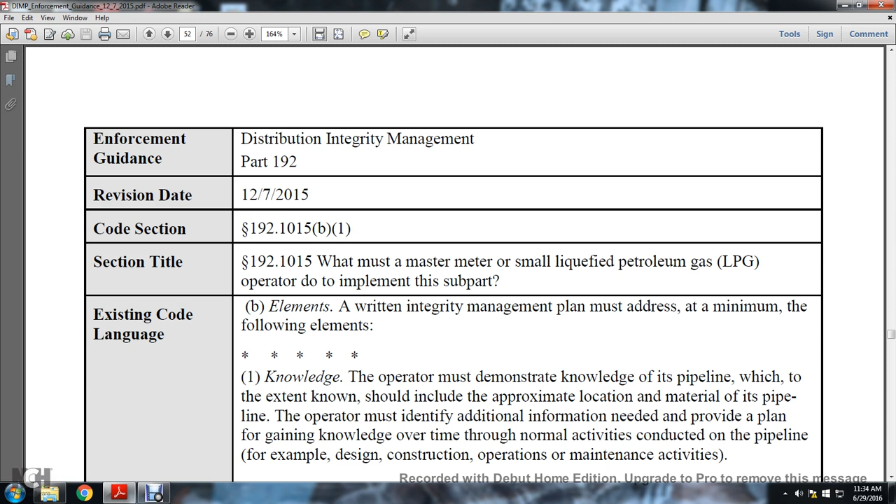Existing code language. B. The elements written integrity management plan must address at a minimum the following elements. 1. Knowledge. The operator must demonstrate knowledge of the pipeline, which to the extent known should include the approximate location and material of the pipeline. The operator must identify the additional information needed and provide a plan for gaining knowledge over time through the normal activities conducted on the pipeline, for example, design, construction, operation, and maintenance activities.

The origin of the code is 192.1015, 74 FR 63906, December 4, 2009. Last amendment not foreseeable. Interpretation summaries not foreseeable. Advisory bulletin alert and notice summaries not foreseeable. Other material and sources addressed in the Distribution Integrity Management Program Final Rule Preamble, the Federal Register, Volume 74, Number 232, Friday, December 4, 2009. Rules and Regulations. Comment Topic 20. Knowledge of the pipeline, environmental factors. Page 63919.

Distribution integrity management frequently asked questions. C4A1. The rule requires the operator to know its system; must the operator excavate simply to gather information about the parts of the system where it may not have complete knowledge? C4A2. There are some characteristics about the operator system that may not be known during the development of the integrity management program. What is the PHMSA expectation for filling those voids? C4A3. Qualified subject matter expert, and the details required to collect on new gas pipelines going into the ground.

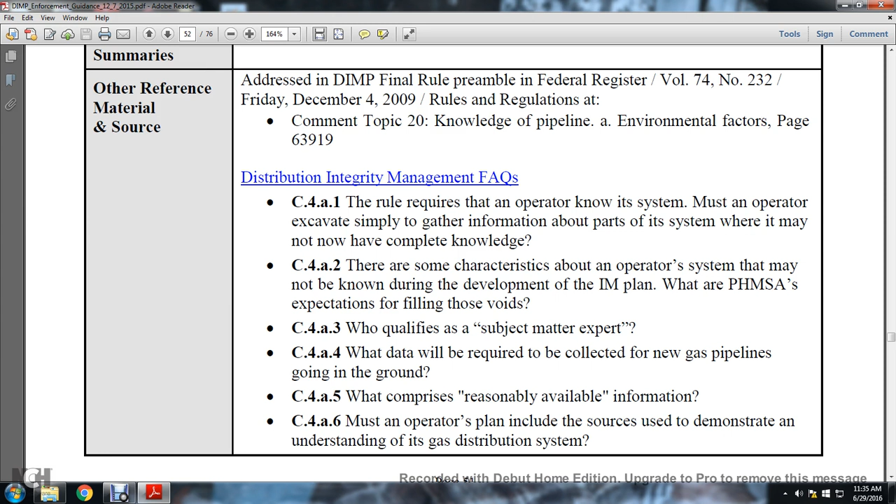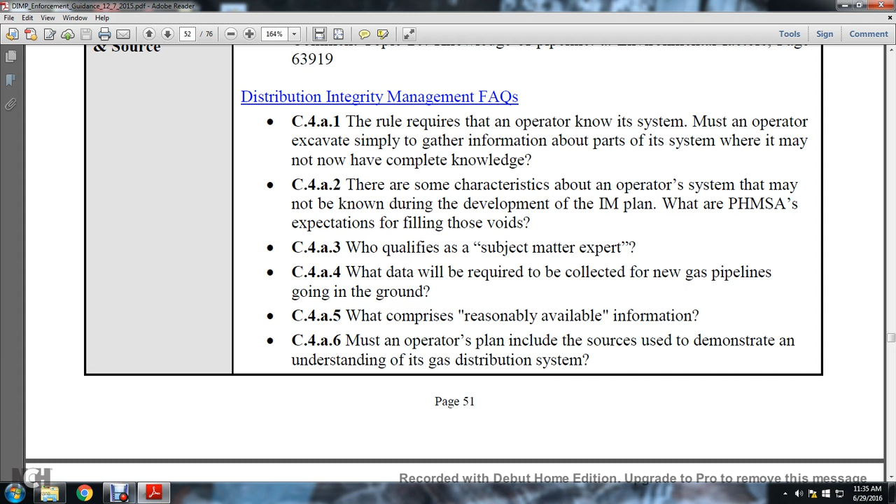C4A5. What comprises reasonably available information. C4A6. Must an operator's plan include the sources used to demonstrate an understanding of the gas distribution system. The Gas Piping Technology Committee guidance material, Appendix G-192-8, Section 3, Knowledge. Guidance information. 1. The master meter and the small liquefied petroleum gas operators are treated differently in the Distribution Integrity Management Program rule than large operators.

From 192.1001, the Integrity Management Plan means a written explanation of the mechanisms or procedures the operator will use to implement the integrity management program and to ensure compliance with the subpart. For most master meters and small liquefied petroleum gas operators, the integrity management program must include the appropriate set of mechanisms or procedures developed and implemented for each of the program elements.

The applicability of the word mechanism for these operators is important, as a synonym for process. The operator may employ a written explanation of the process employed, the mechanism developed and implemented for each required element, that is less specific than a written procedure. The integrity management program for these pipelines should reflect the relative simplicity of these types of pipelines. The distribution integrity management plan should be concise but still sufficient for the operator personnel to understand and implement the program on a consistent basis.

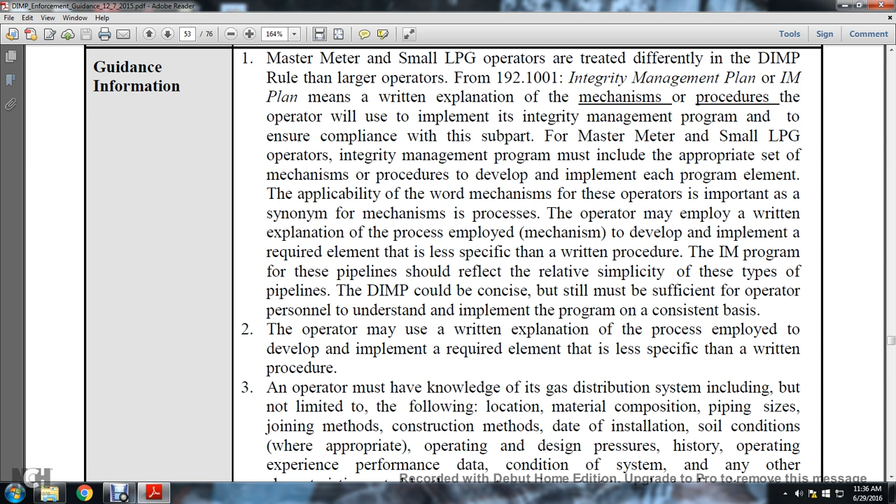2. The operator may use a written explanation of the process employed, developed and implemented for the required element, that is less specific than a written procedure. 3. An operator must have knowledge of the gas distribution system including but not limited to the following: location, material, composition, pipe size, joint method, construction method, date of installation, soil conditions where appropriate, operating and design pressure, history, operating experience, performance data, condition of the system, and any other characteristics noted by the operator.

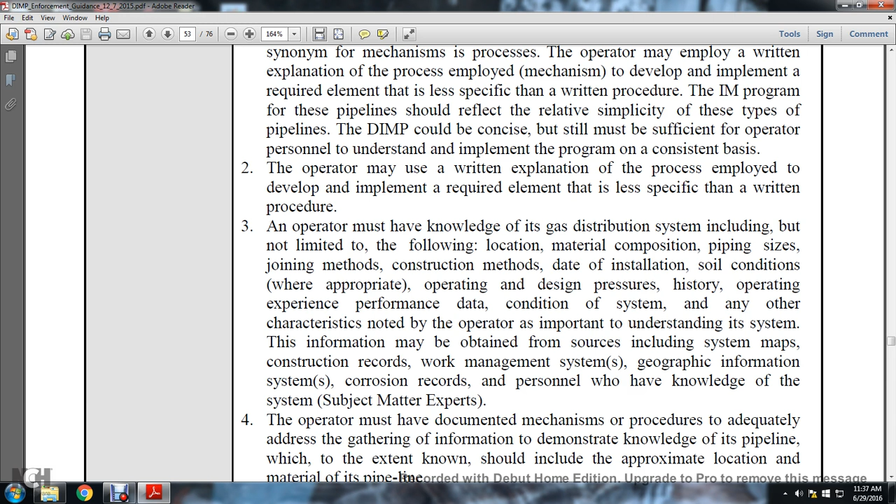An important understanding of the items in this information may be obtained from sources including system maps and construction records, work management systems, geographical information, corrosion records, and personnel having knowledge of the system, subject matter experts. 4. The operator must have a documented mechanism or procedure adequately addressing gathering information to demonstrate knowledge of its pipeline, which to the extent known should include the approximate location and material of the pipeline.

5. The operator must identify the additional information needed and provide a plan for gaining knowledge over time through the normal activities conducted on the pipeline, for example, design, construction, operation, and maintenance activities. The Distribution Integrity Management Program must list the names of the operator-specific information sources not generic terms such as O&M documents.

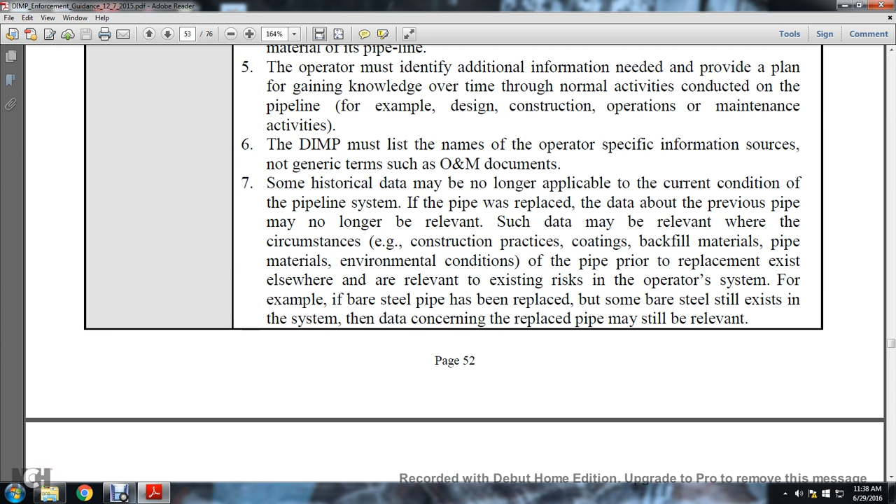Some historical data may be no longer applicable for the current condition of the pipeline system. The pipe was replaced; the data of the previous pipe may no longer be relevant. Such data may be relevant where the circumstances of the construction practice, coating, backfilling, materials, piping, and environmental conditions of the pipe prior to replacement exist elsewhere, and are relevant to existing risks in the operator system. For example, if bare steel pipe has been replaced but some of the bare steel still exists within the system, the data concerned with the replaced pipe may still be relevant.

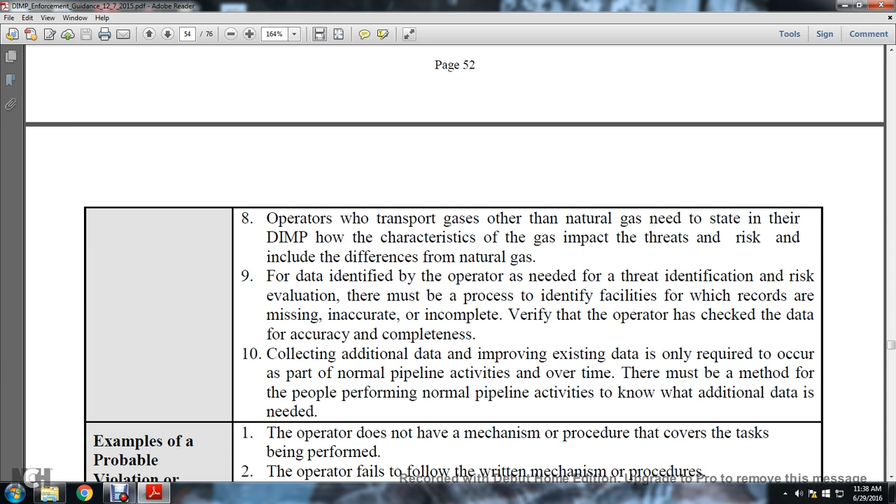8. Operators who transport gas other than natural gas need to state in their distribution integrity management program how the characteristics of the gas impact the threat and risk, including the difference from natural gas. 9. For the data identified with the operator need for threat identification and risk evaluation, there must be a process to identify the facilities for which records are missing, inaccurate, or incomplete, verifying the operator has checked the data for accuracy and completeness.

10. The collection of additional data improving existing data is only required to occur as a part of the normal pipeline activities over time. There must be a method for people performing normal pipeline activities to know what additional data is needed. Examples of probable violation or inadequate procedures: the operator does not have a mechanism or procedure that covers the task being performed. The operator fails to follow the written mechanism or procedures.

3. The operator did not demonstrate that they have looked at all available sources or resources, records, finding information on the past design, operation, maintenance, such as coating material. 4. Operator did not specifically list the documents used to assemble the knowledge of the system. Operator does not gather or use reasonably available data on the entire pipeline that could be relevant to performing the threat assessment and risk evaluation as needed for the group of facilities.

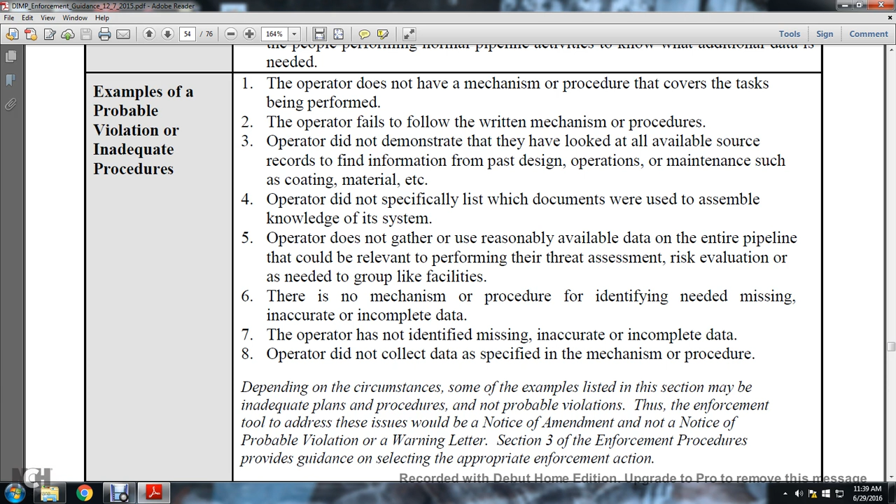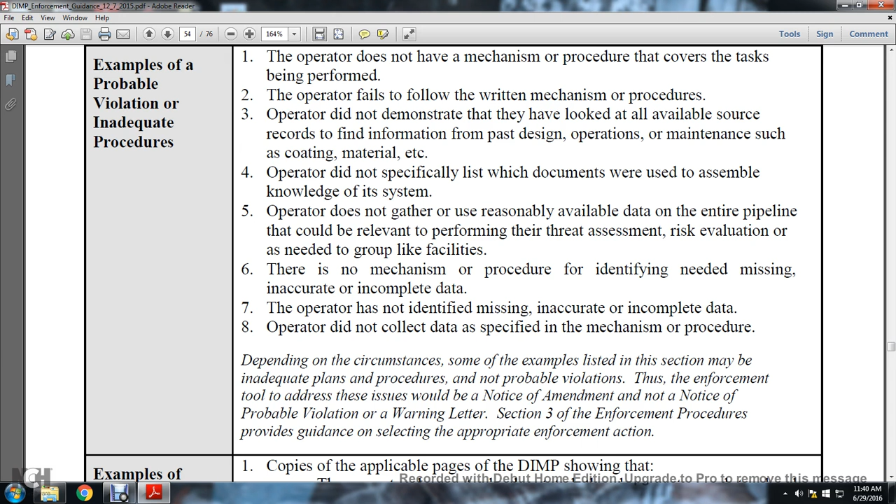6. There is no mechanism or procedure to identify the need for the missing, inaccurate, and incomplete data. The operator has not identified the missing, inaccurate, incomplete data. Operator did not collect the data specified in mechanism procedures. Italics: depending on the circumstances, some of the examples listed in this section may be inadequate plans or procedures, not probable violations. Thus, enforcement tools to address these issues would be notice of amendment, notice of probable violation, or a warning letter. Section 3, the enforcement procedure, provides guidance for selecting appropriate enforcement action.

Examples of evidence. Copies of the applicable pages of the Distribution Integrity Management Program showing the operator has not clearly stated the documents used to develop knowledge of the system. The list of the documents used to develop knowledge of the system is inadequate in identifying design, operating, environmental characteristics of the pipeline system. 2. The copies of applicable pages of the Distribution Integrity Management Program show the program is not detailed enough for the inspector to make a reasonable determination as to the accuracy and thoroughness of the process.

Examples of evidence: copy the applicable page of the operator distribution integrity management program showing the required regulation provisions are not documented or that the records or other documentation are insufficient to prove compliance with the intended regulation or provisions. Copy the applicable page of the operator distribution integrity management program showing the required data collection and utilization of the data not in the distribution integrity management program. Documented photograph evidence demonstrating the violations. Documented oral or written statements from operator personnel. The other special notifications are blank.

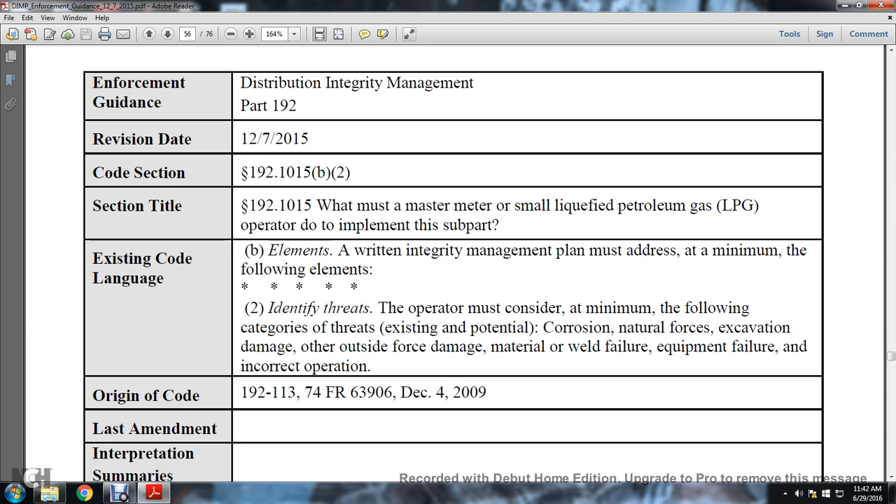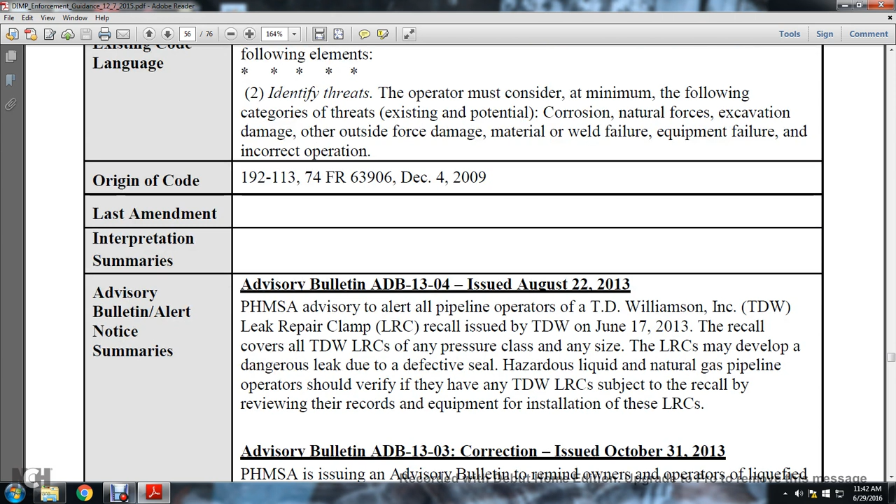Continuing on, Distribution Integrity Management Part 192, December 7, 2015, 192.1015(b)(2). Also, the section title 192.1015, what must a master meter or small liquefied petroleum gas operator do to implement this subpart. Existing code language: elements of a written integrity management plan must address at a minimum the following elements. 2. Identifying threats: the operator must consider at a minimum the following categories: corrosion, natural forces, excavation damage, other outside force damage, material and weld failure, equipment failure, and incorrect operation. Origin of Code 192-113, 74 FR 63906, Federal Register, December 4, 2009, and last amendment. Interpretation summaries not available.

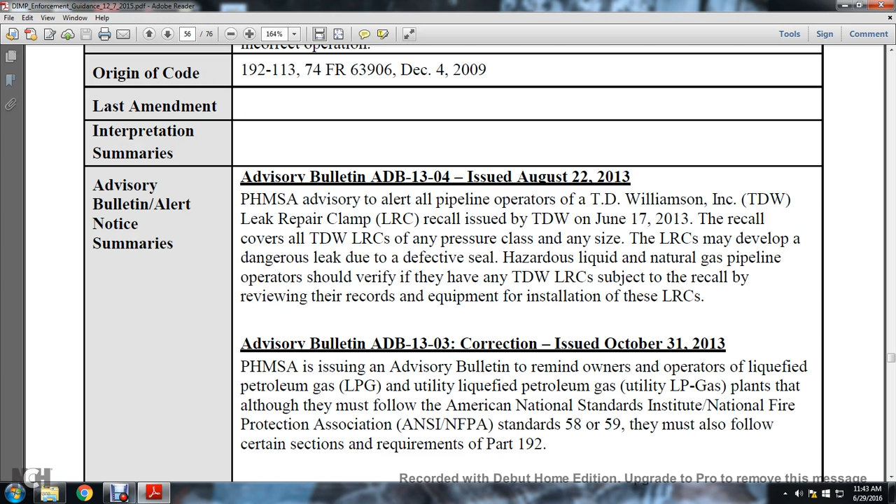Advisory Bulletin: Alert Notice Advisory Bulletin 13-04 issued on August 22nd, 2013. The Pipeline and Hazardous Materials Safety Administration advises and alerts all pipeline operators of the T.D. Williamson Incorporated Leak Repair Clamp, or LRC, recall issued by TDW on June 17, 2013. The recall covers the T.D. Williamson Incorporated leak repair clamp for all pressure classes; any size of the leak repair clamp may develop a dangerous leak due to defective seals. Liquid and natural gas operators should verify whether they have any T.D. Williamson Incorporated leak repair clamps subject to the recall by reviewing their records and inspecting the leak repair clamps.

Advisory Bulletin 1303, correction issued on October 31, 2013. The Pipeline and Hazardous Materials Safety Administration issued an advisory bulletin to remind owners and operators of liquefied petroleum gas or utility liquefied petroleum gas plants that although they must follow the American National Standards Institute and National Fire Protection Association standards 58 and 59, they must also follow certain section requirements of Part 192.

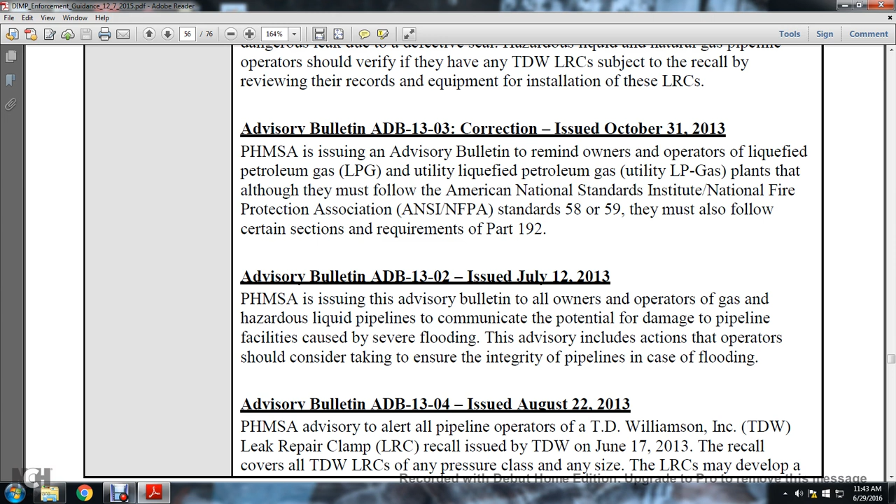Advisory Bulletin 1302, issued July 12, 2013. PHMSA issued the Advisory Bulletin to all owners and operators of gas and hazardous liquid pipelines to communicate potential damage to pipeline facilities caused by severe flooding. The Advisory includes actions operators should consider taking to ensure the integrity of pipelines in the case of flooding.

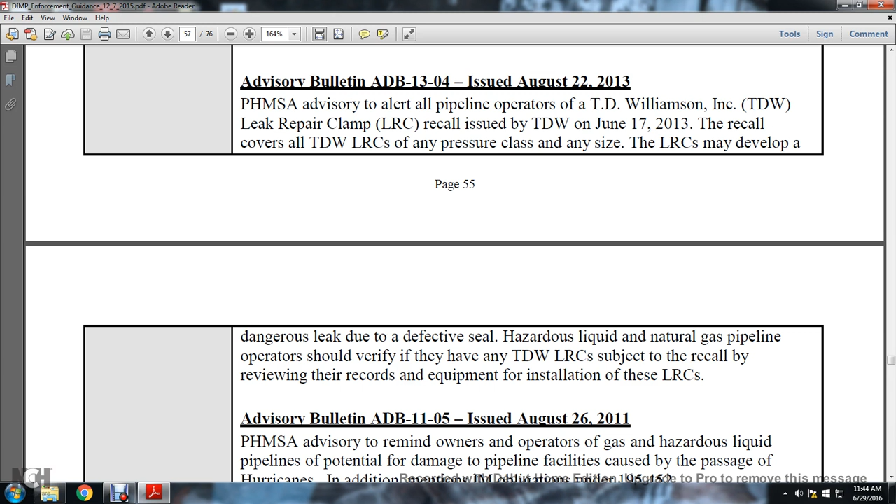Advisory Bulletin 1304, issued August 22nd, 2013. Pipeline and Hazardous Materials Safety Administration Advisory to alert all pipeline operators of a T.D. Williamson Incorporated Leak Repair Clamp recall, issued by T.D. Williamson Incorporated on June 17, 2013. The recall covers TDW's leak repair clamps of any pressure classes and sizes. The leak repair clamp may develop a dangerous leak due to a defective seal. Hazardous liquid and natural gas pipeline operators should verify if they have any T.D. Williamson Incorporated leak repair clamp subject to the recall by reviewing records and equipment for installation of the repair clamps.

Advisory Bulletin 1105, issued August 26, 2011. Pipeline and Hazardous Materials Safety Administration Advisory to remind owners and operators of gas and hazardous liquid petroleum pipelines of the potential for damage to pipeline facilities caused by the passage of hurricanes. In addition, it mentions integrity management obligations under

195.452. Advisory Bulletin 1205, issued March 20th, 2012. Pipeline and Hazardous Materials Safety Administration urged owners and operators to conduct a comprehensive review of their cast iron distribution pipeline system replacement programs, to accelerate the repair, rehabilitation, and replacement of aging high-risk pipeline. In addition, the Advisory Bulletin notes regulatory requirements for natural gas distribution companies to develop a Distribution Integrity Management Program for pipelines owned, operated, and maintained.

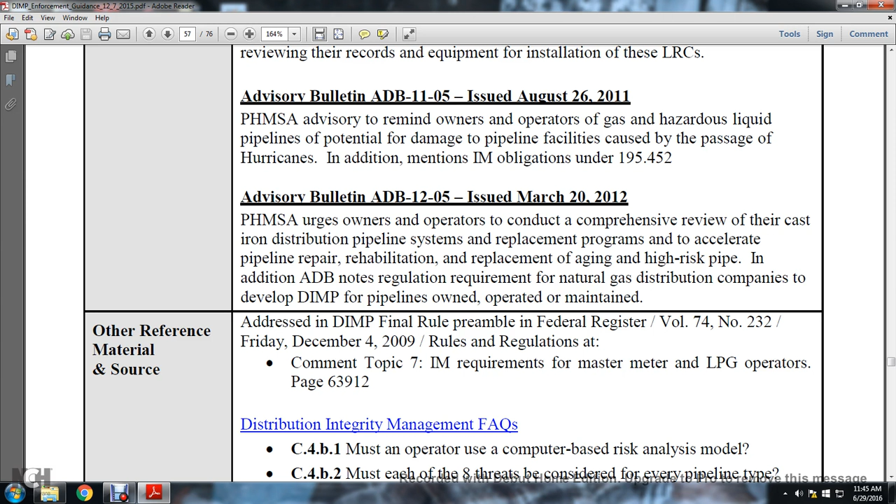Other reference sources addressed in the Distribution Integrity Management Final Rule Preamble of the Federal Register 74-232, Friday, December 4, 2009, Rules and Regulations, Comment Topic 7 on Integrity Management requirements for Master Meter and Small Liquefied Petroleum Gas Operators, page 63912. Distribution Integrity Management Frequently Asked Questions, C4B1.

C4B2: Must each of the 8 threats be considered for every pipeline type?

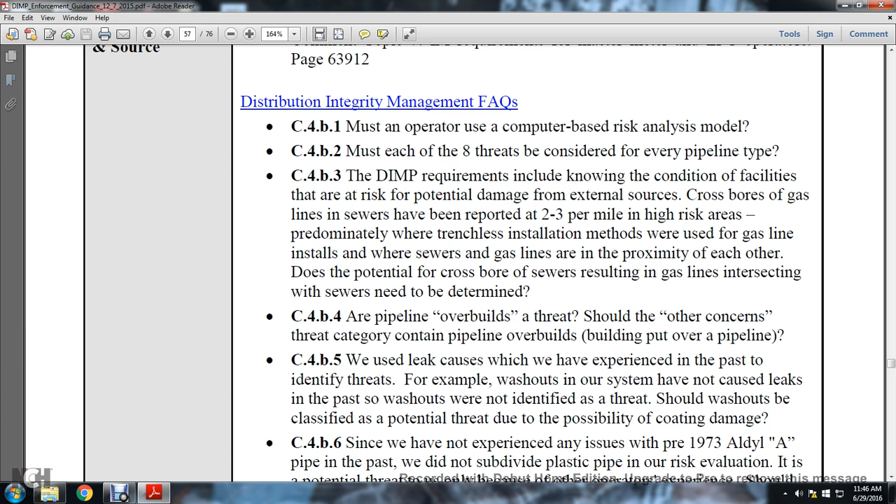C4B3: The Distribution Integrity Management Program requires knowing the condition of facilities that are at risk, and the potential damage from external sources, such as cross-bores of gas lines and sewers that have been reported at 2 to 3 per mile in high-risk areas, predominantly where trenchless installation methods were used for gas line installation, where sewer and gas lines are approximately near each other. The potential of cross-bore sewers resulting in gas line sections intersecting with sewers needs to be determined.

C4B4: Are pipeline overbuilds a threat? Should the other concerns threat category contain pipeline overbuilding, where a building is built over the pipeline?

C4B5: We use leak causes which we have experienced in the past to identify threats. For example, washouts in our system have not caused leaks in the past, so washouts are not identified as a threat. Should washouts be classified as a potential threat due to the possibility of coating damage?

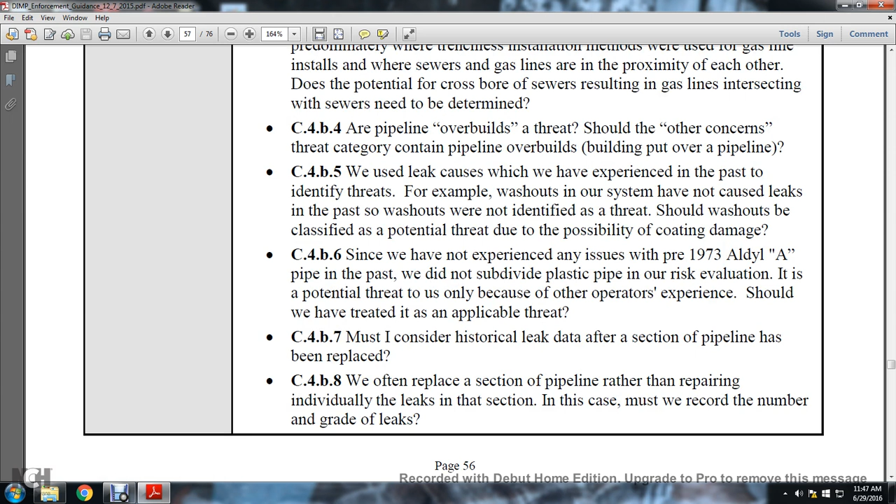C4B7: Must I consider historical leak data after a section of pipeline has been replaced? C4B8: We often replace sectional pipeline rather than repairing individual leaks in that section. In this case, we must record the number and grade of leaks.

C4B9: We experience problems in ranking potential threats, as some low frequency events have not occurred in our system to date. When this occurs, mixing apples and oranges arises when assigning frequency or probability to a threat that has not occurred, and ranking it alongside events that do have frequency. How should we account for low or no frequency threats when evaluating and ranking risk?

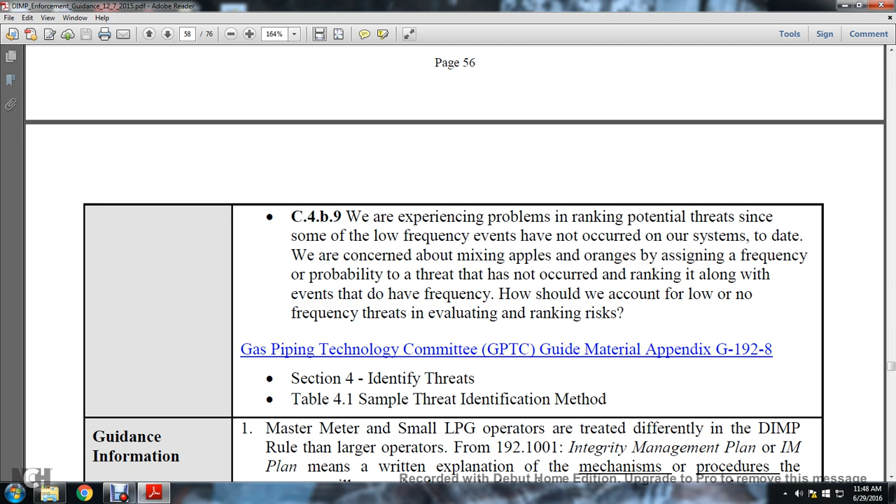The Gas Piping Technology Committee Guide Material, Appendix G192.8, Section 4, Identify Threats, Table 4.1, Sample Threat Identification Method.

The integrity management program for the pipeline should reflect the relative simplicity of these types of pipelines. The distribution integrity management program could be concise but still sufficient for the operator personnel to understand and implement the program on a consistent basis.

The operator may use a written explanation of the process employed to develop and implement a required element that is less specific than the written procedure.

After characterizing the system, the operator must identify the threats relevant to the distribution segments. The process must meet the need for establishing realistic identification of threats and determination of whether the frequency and level of significance requires a response that goes beyond normal operating practices.

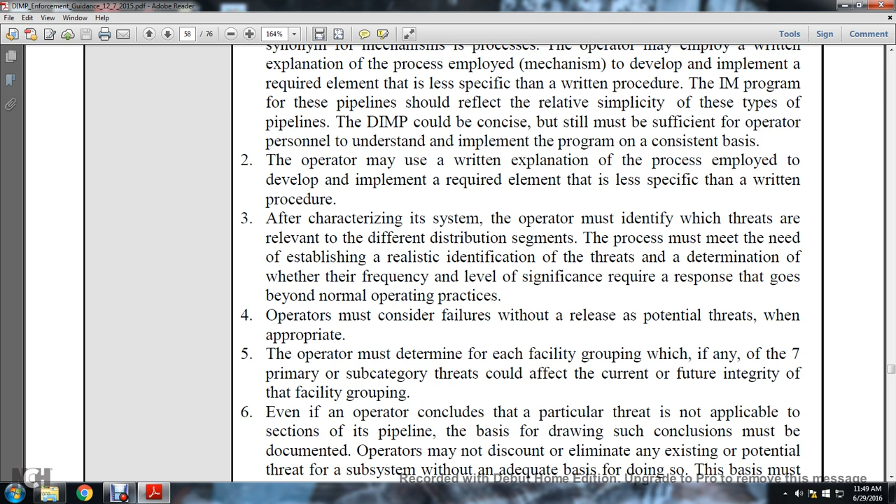The operators must consider failures without release as potential threats when appropriate. The operator must determine for each facility grouping whether any of the 7 primary or subcategory threats could affect the current or future integrity of the facility grouping.

Even if the operator concludes a particular threat is not applicable to sections of the pipeline, the basis for drawing such conclusions must be documented. The operators may not discount

or eliminate any existing or potential threats to the subsystem without adequate basis for doing so. The basis must consider pipeline failure history, design, manufacturing, construction, operation, and maintenance. The reason for excluding the pipe must be documented within the operator's integrity management program.

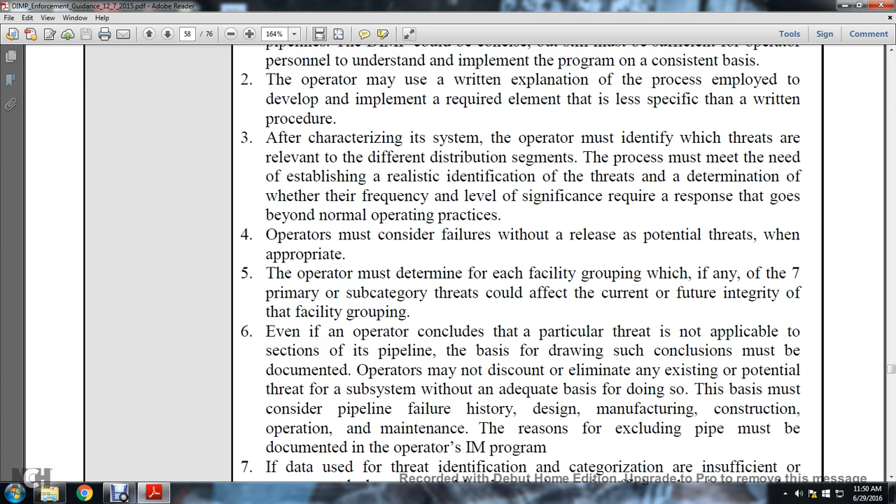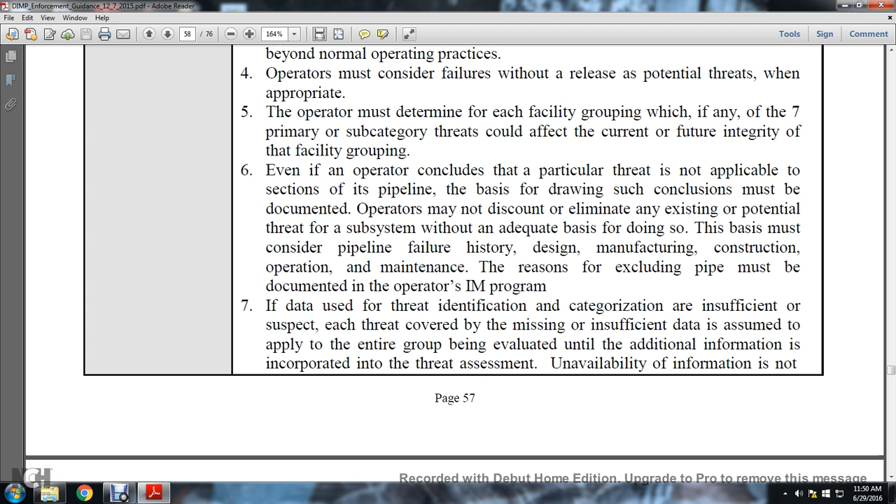If the data used in threat identification and categorization are insufficient, each threat covered by the missing or insufficient data shall be assumed to apply to the entire group being evaluated, until the additional information incorporated into the threat assessment.

Unavailability of information is not justification for exclusion of a threat. Where the data is missing or insufficient, conservative assumptions should be used in the risk assessment. Records must be maintained to identify the unsubstantiated data used that impact the variable accuracy of the assessment, and the results would be considered.

It may also be appropriate to subdivide threats, for example, to consider atmospheric corrosion of above-ground pipe and external corrosion of buried pipeline separately. Another example would be subdividing or knowing the problem materials.

Excavation damage must be included in threats considered within the distribution integrity management program. Even if the operator has good external damage experience through the damage prevention program, it is not acceptable for the operator to say that this threat is dealt with outside the distribution integrity management program, and therefore need not be included.

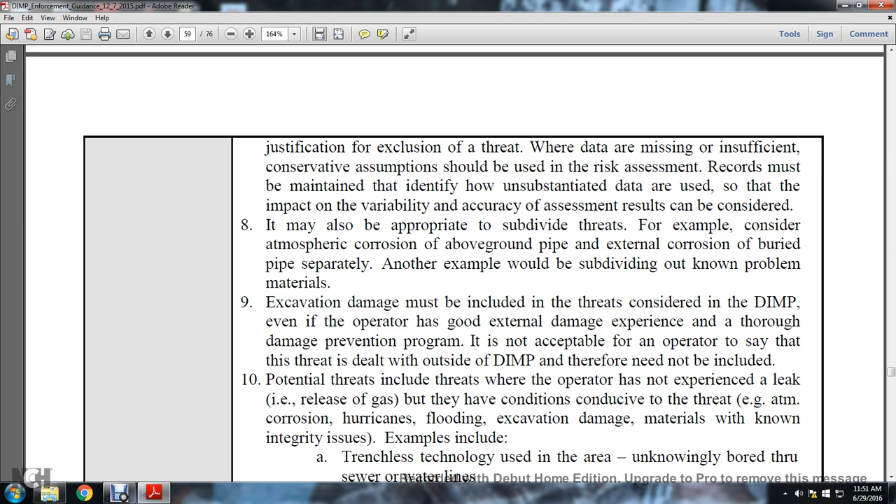Potential threats include threats where the operator has not experienced a leak or release of gas, or where they have conditions conducive to threats such as corrosion, hurricane, flooding, excavation damage, materials with known integrity issues.

Examples include: trenchless technology used in the area unknowingly bored through sewer and water lines; future utility road improvement projects; the discovery of material not previously known to be in the system; the customer built structure over the existing pipelines; and overpressurization events.

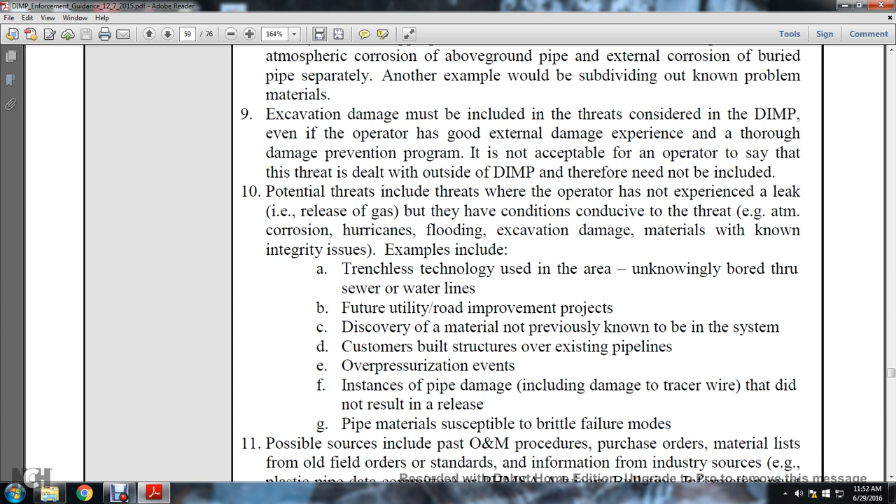An incident where the pipeline got damaged, including damage of the tracer wire, that did not result in release; and pipe materials susceptible to brittle failure modes.

Possible sources include operation and maintenance procedures, purchase orders, material listings from old field orders and standards, information from industry sources, the plastic pipe data committee, or the Pipeline Hazardous Materials Safety Administration advisory bulletins.

Information must include, for example, past continuing surveillance records per 192.613, and the example of a probable violation or inadequate procedures.

The operator does not have a mechanism or procedure to cover the task being performed. The operator fails to follow the written mechanism or procedure. The mechanism or procedure does not include review of the 7 primary threats. Not all of the 7 primary threats required by law or rule were adequately considered or evaluated.

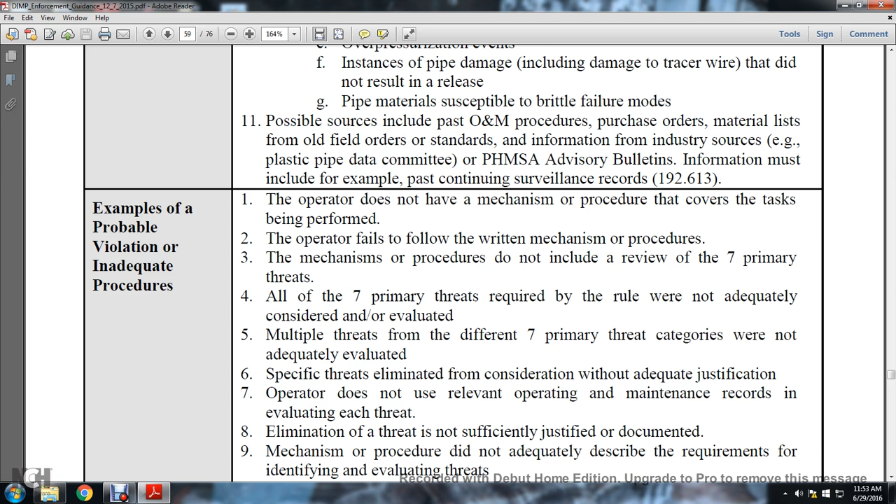Multiple threats from different primary threat categories were not adequately evaluated. Specific threats were eliminated from consideration without adequate justification. The operator does not use relevant operating and maintenance records in evaluating each threat. Eliminating a threat is not sufficiently justified or documented.

Mechanisms or procedures did not adequately describe the requirements for identifying and evaluating threats. The operator did not use reasonable and appropriate subdivision of threats. The mechanism or procedure did not include review of potential threats. The operator did not use all reasonably available records.

Depending on the circumstance, some examples listed in the section may be inadequate for plans or procedures but not a probable violation. The enforcement tools to address these issues would be notice of amendment, notice of probable violation, or warning letter. Section 3 of the enforcement procedures provides guidance for selecting appropriate enforcement action.

Examples of evidence include copies of applicable pages from the operator's integrity management program which demonstrate inadequate mechanisms and procedures, and reasonably available external information, such as advisory bulletins identifying threats applicable to the operation system that were not considered in developing the distribution integrity management program.

Documented photographic evidence that demonstrates the violation, and documented oral or written statements from operational personnel, or special notations not otherwise visible.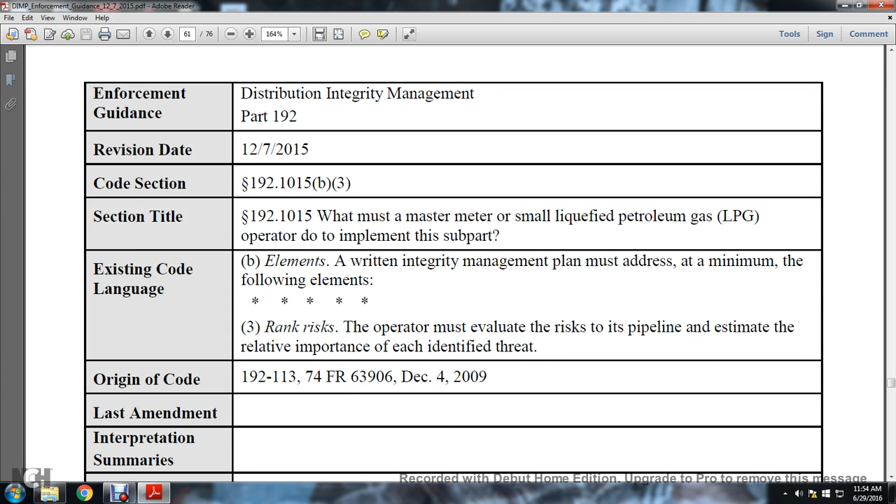Rank risk: the operator must evaluate the risk of its pipeline and estimate the relative importance of each identified threat. The origin code is 192-113, 74 Federal Register 63906, December 4th, 2009.

Last amended interpretation summaries and advisory bulletin alert notice summaries are not reflected here. Other reference material addresses the Distribution Integrity Management Program Final Rule Preamble, Federal Register Volume 74, Number 232, Friday, December 4, 2009, Rules and Regulations, Comment Topic 22, Risk Ranking Assessment, page 63920.

Distribution Integrity Management frequently asked questions. C4, C1: What are the key things the operator should focus on when developing an effective risk assessment methodology? C4, C2: From which date is the operator required to collect data for their plan?

C4, C3: How are identified threats to system integrity expected to be handled in an operator's distribution integrity management program plan? C4, C5: Do multiple threats need to be considered for each facility grouping, and do all threats need to be in one relative risk ranking?

C4, C6: What is expected of a multi-state operator in regard to risk ranking? C4, C7: If an operator plans to perform risk ranking by state, regardless of the outcome of the risk ranking, will it not decrease the historical level of expenditures for each system?

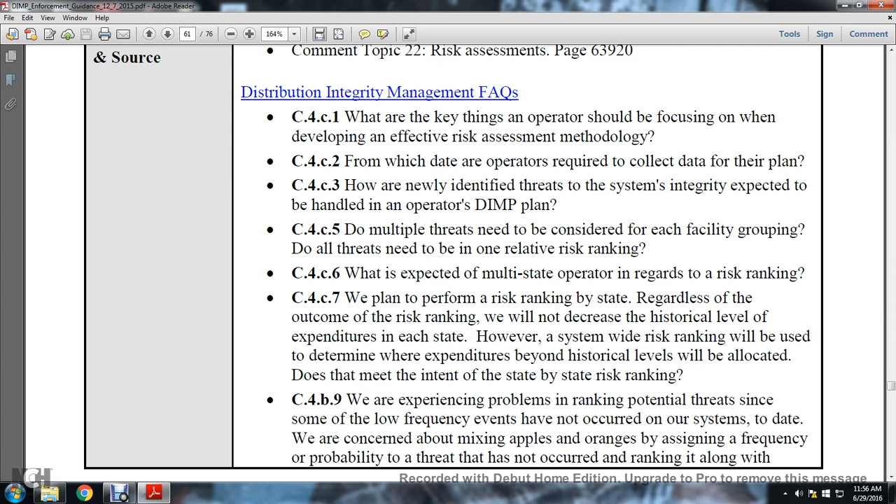However, the system-wide risk ranking will be used to determine whether expenditure beyond historical levels allocated meets the intent of the state and the state's risk ranking.

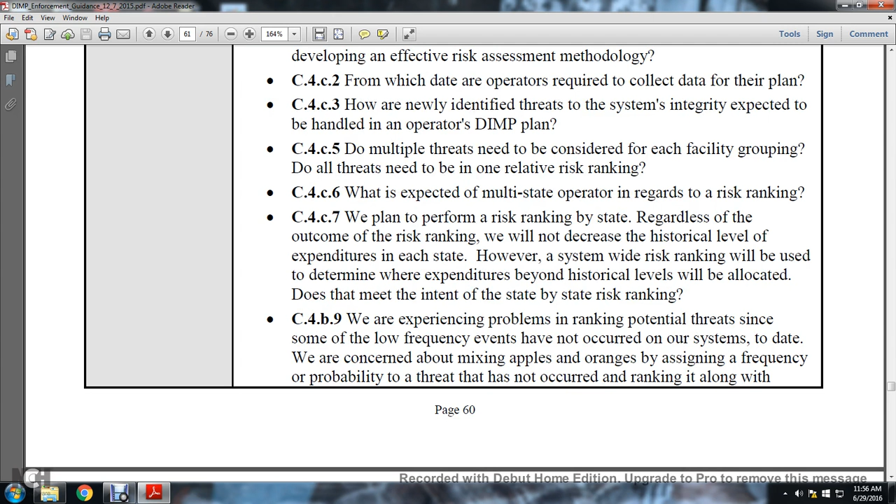C4, B9: We are experiencing problems ranking potential threats, as some low-frequency threats have not occurred in our systems to date. We are concerned with mixing apples and oranges by assigning a probability to a threat that has not occurred alongside events that have due frequency. How should we account for low or no-frequency threats when evaluating and ranking risk?

Gas Piping Technology Committee Guide Material, Appendix G-192-8, Section 5: Evaluating and Ranking Risk. The guidance information treats master meter and small liquefied petroleum gas operators differently in the Distribution Integrity Management Program, per Section 192.1001, Integrity Management Plan.

The Integrity Management Plan means of written explanation, mechanism, or procedure. The operator will use the implemented integrity management program to ensure compliance with the subpart for master meter and small liquefied petroleum gas operators.

The integrity management program must include an appropriate set of mechanisms and procedures developed and implemented for each program element. The applicability of the word 'mechanism' for the operator is important, as it is a synonym for the process the operator may employ—a written explanation of the process employed with the mechanism developed and implemented.

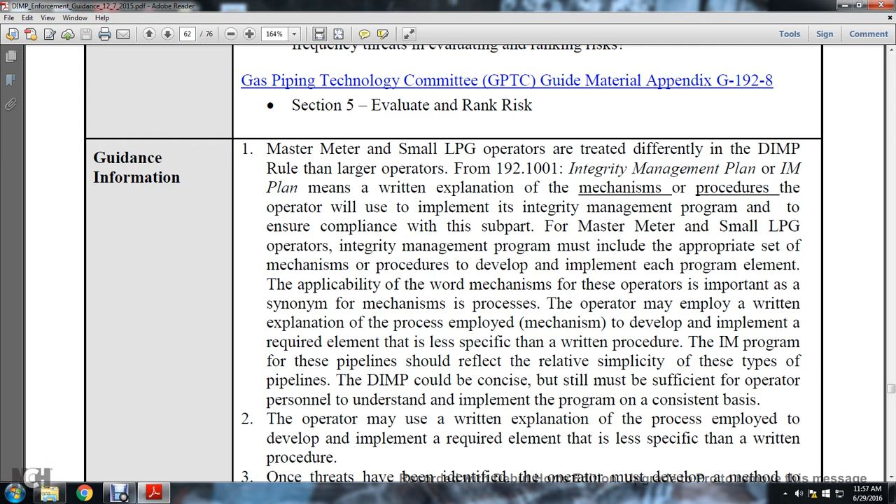The required elements are less specific for the written procedure. The integrity management program for the pipeline should reflect the relative simplicity of these types of pipelines. The distribution integrity management program could be concise but still sufficient for operator personnel to understand and implement the program consistently.

The operator may use a written explanation of the process employed to develop and implement required elements, less specific than a written procedure. Once a threat has been identified, the operator must develop a method to assess and prioritize associated risk, in order to address those of greatest concern first.

In performing the risk analysis, it is important to note the risk, the likelihood of the event occurring times the consequence of the event. An event that is highly likely and has a highly public safety consequence constitutes an event of the greatest concern.

An unlikely event having minimal consequences may not justify extraordinary precautions, while an unlikely event that could have very high consequences may justify additional precautions. Distribution incidents are defined in Title 49 CFR 191, Transportation of Natural and Other Gas by Pipeline.

Annual reports, incident reports, safety-related condition reports, and data contained within the Pipeline and Hazardous Materials Safety Administration incident database often capture events that are low likelihood but highly consequential.

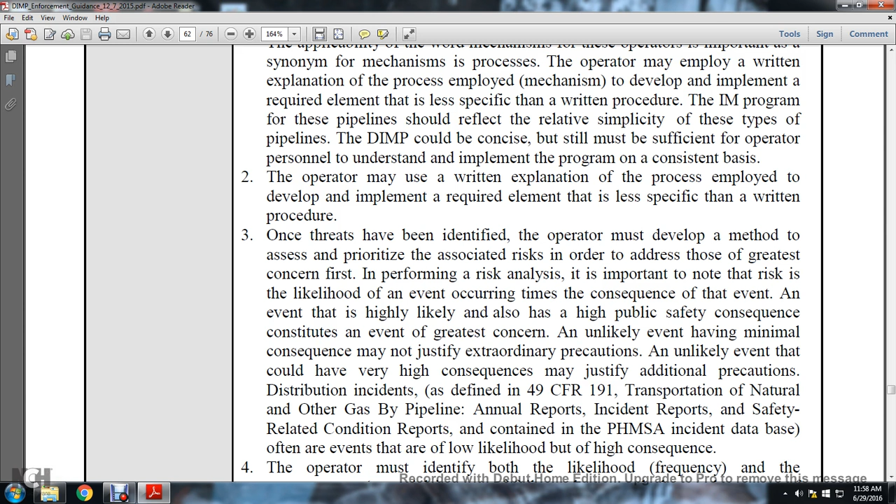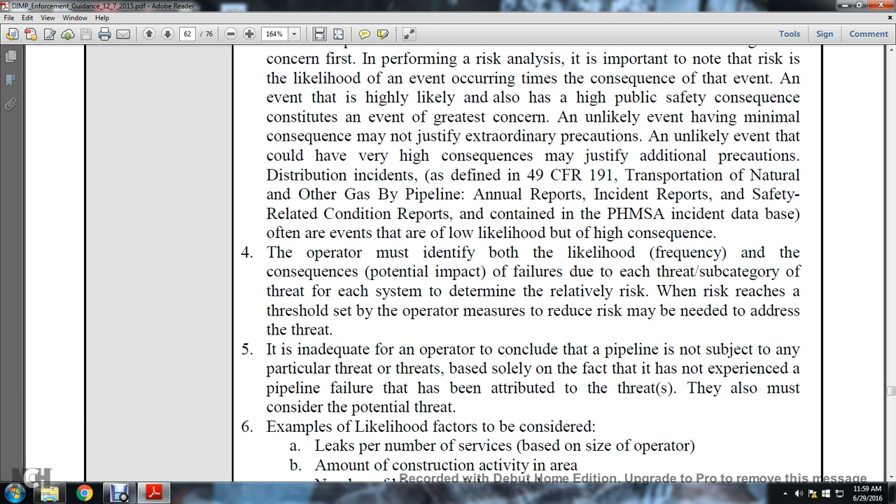4. The operator must identify both likelihood of the frequency of the consequence and the potential impact of the failures due to each of the subcategory threat in each system, determining the relative risk. When the risk reaches a threshold set, the operator measures to reduce the risk may be needed to address the threat. 5. It is inadequate for the operator to conclude that the pipeline is not subject to any of the particular threats based solely on the fact that it has not experienced a pipeline failure that has been attributed to the threat, and they also must be considered a potential threat.

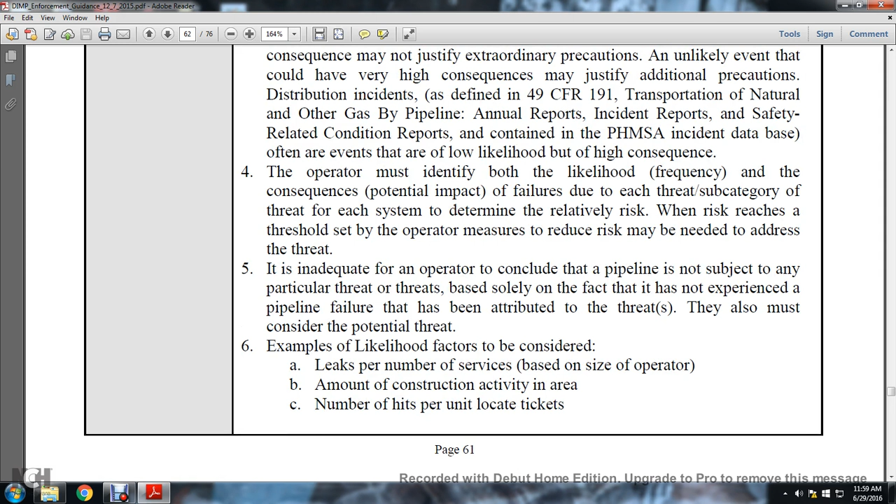Example, the likelihood factors to be considered: A, leaks per number of services based on the size of the operator, B, the amount of construction activity in the area, and C, the number of hits per unit locate tickets. 7. Example, the consequence factors to be considered: A, operating pressure, B, population density, downtown versus rural, C, impact, loss of supply, D, the number of the customers affected, E, the proximity to structures and critical facilities, schools, and hospitals, F, the proximity of known groups of people limited in mobility, usually institutionalized.

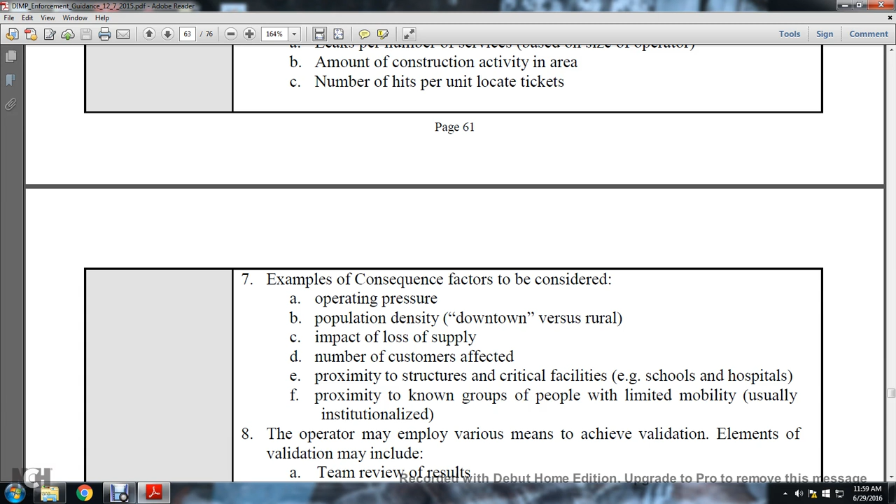8. The operator may employ various means of achieving validation. Elements of the validation may include team review of the results, subject matter expertise reviews. And 9. The operator must have the mechanism, procedure, validation, results of the risk analysis process. The result generated by the model should agree with the consensus of the validation group. If analysis results do not identify known risks, the factors, evaluation model, or method must be questioned and analyzed and, if necessary, revised.

Examples of probable violations and inadequate procedures: the operator does not have a mechanism procedure for the coverage of the task being performed. The operator fails to follow the written mechanism procedure. The operator did not perform risk evaluation to estimate the relative importance of the identified threat. A comprehensive risk analysis process was not adequately developed. 5. All portions of the pipeline were not included in the risk analysis. 6. The process did not adequately consider the unique risk factors when using the standard risk model.

7. The risk analysis process was not adequately documented. 8. The risk analysis process did not adequately consider all identified risks. 9. The operator's specific leak and failure history and other operational experience were not adequately considered in the risk analysis. 10. Poor quality data was used in the risk analysis. 11. The basis for risk model scores has inadequate documentation. 12. The operator did not validate the results of the risk evaluation.

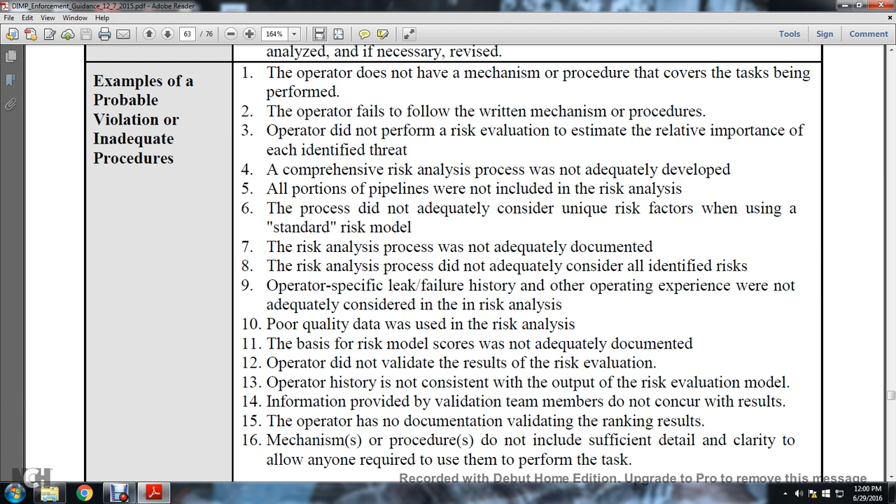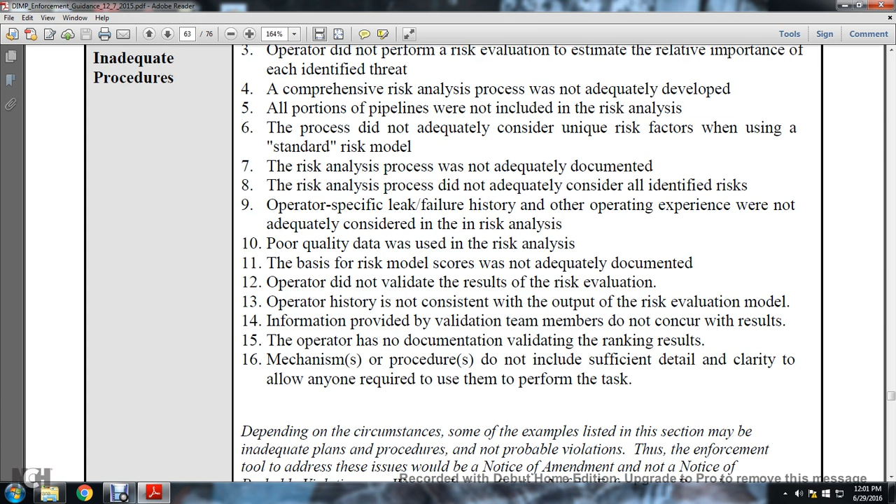13. The operator history is not consistent with the output of the risk evaluation model. Information provided by the validation team does not concur with the results. The operator has no documented validation of the ranking results. 16. The mechanism procedure does not include sufficient detail and clarity to allow anyone required to use it to perform the task. Depending on the circumstances, some of the examples listed in this section may be inadequate plans or procedures but are not probable violations. Thus, an enforcement tool to address these items is the notice of amendment and not a notice of probable violation.

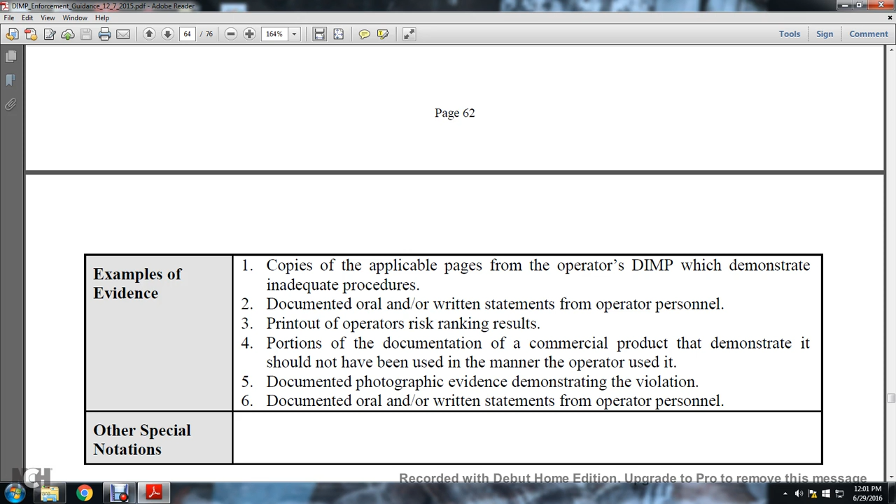Section 3. The enforcement procedure provides guidance on selecting the appropriate enforcement action. Examples of evidence: a copy of applicable pages of the operator's distribution integrity management program demonstrating inadequate procedures, documented oral or written statements from operational personnel, printouts of the operator's risk ranking results, portions of the documentation of commercial products demonstrating it should not have been used in the manner the operator used it, documented photographic evidence demonstrating the violation, documented oral or written statements from the operational personnel. Other special notations are not so visible.

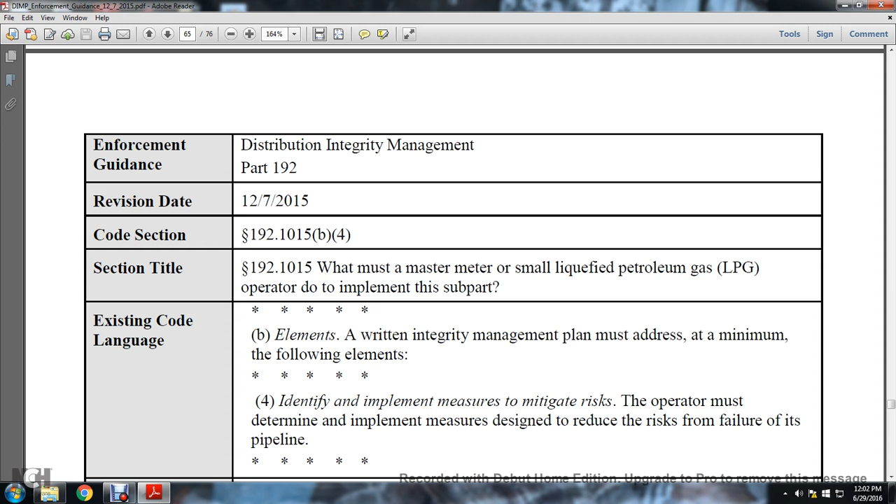Alright, continuing on, Enforcement Guidance Distribution Integrity Management Part 192, December 7th, 2015, 192.1015(b)(4). What must a master meter or small liquefied petroleum gas operator do to implement the subpart? Existing code language: elements the integrity management plan must address at minimum. The existing code language: identifying and implementing measures to mitigate the risk. The operator must determine and implement the measures designed to reduce the risk of failure of its pipeline. Origination: 74 FR 63906, December 4, 2009. Last amendment, interpretation summaries, and advisory bulletin alert notice summaries not available.

Other references and material sources: distribution integrity management final rule preamble, Federal Register Volume 74, Number 232, Friday, December 4, 2009, Rules and Regulations. Comment topic 14, leak monitoring, page 63917. Comment topic 16, integrity management program evaluation and improvement, 63918, and comment topic 23, performance measures, 63922. Distribution integrity management frequently asked questions. C4D1: must the operator implement additional accelerated actions to reduce the risk from the pipeline.

The frequently asked question C4D2: how will small operators with limited staff be able to implement the requirements of the risk analysis selection and the risk control measures? C4D3: if an operator already had a leak management program, does the operator have to implement a new program in response to the regulations?

C4D4: why not simply require the operator of the gas distribution pipelines to replace the old pipe? C4D5: what kind of issues should the operator focus on addressing the threat of excavation damage as part of the distribution integrity management program? C4D6: in order to eliminate the need for the leak management program, how quickly would the operator need to repair all leaks?

C4D7: can installation of excess flow valves mitigate the risk? C4D8: what criteria should the operator use to identify when measures to reduce the risk are needed? C4D9: do all actions an operator takes to reduce the risk need to be included in the distribution integrity management program? C4D10: we have heard operators will be required to implement specific measures to reduce the risk. Can you describe the required action? C4D11: how can an operator demonstrate their leak management program is effective?

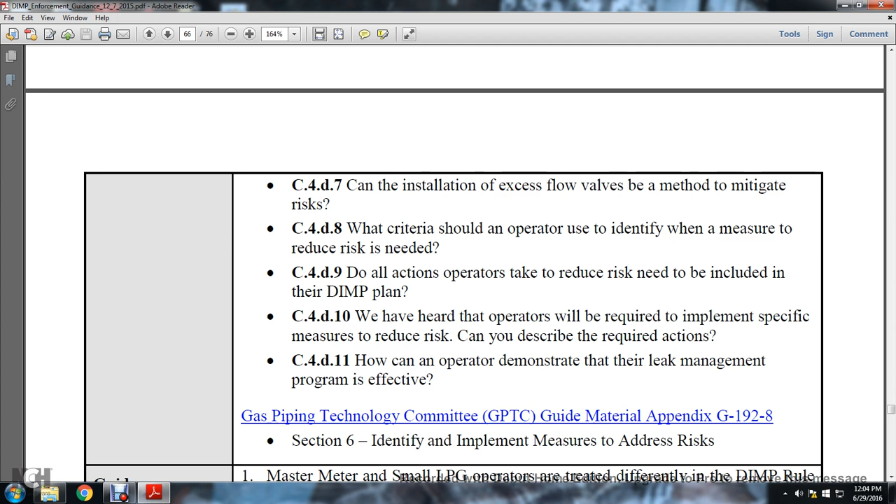Gas Piping Technology Committee, the GPTC, Guide Material Appendix G192.8, Section 6, identifying and implementing measures to address the risk. General information: master meter and small liquefied petroleum gas operators are treated differently in the distribution integrity management program. The large operators follow 192.1001, the integrity management program: a written explanation of the mechanisms or procedures the operator will use to implement the integrity management program and to ensure compliance with the subpart.

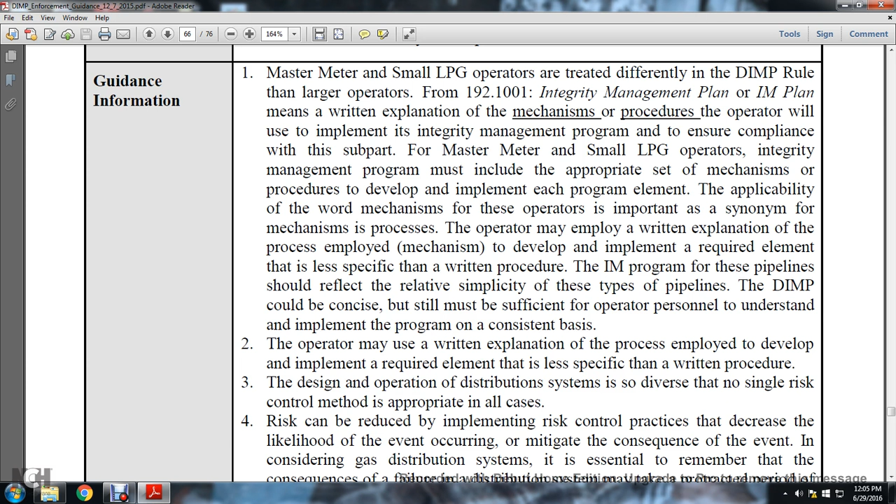For the master meters and the small liquefied petroleum gas operators, the integrity management program must include an appropriate set of mechanisms or procedures to develop and implement each of the program elements. Applicability of the word mechanism for these operators is important, as a synonym of mechanism is process. The operator may employ a written explanation of the process employed to develop and implement a required element that is less specific than a written procedure. The integrity management program for these pipelines should reflect the relative simplicity of these types of pipelines. The distribution integrity management program should be concise but still must be sufficient for the operator personnel to understand and implement the program on a consistent basis.

Alright, 2. The operator may use a written explanation of the process employed to develop and implement a required element that is less specific than a written procedure. 3. The design and operation of distribution systems are so diverse that no single risk control method is appropriate in all cases. Risk can be reduced by implementing risk control practices that decrease the likelihood of an event occurring or mitigate the consequences of the event. Considering the gas distribution system, it is essential to remember that failures of the distribution system may develop over a protracted period of time, and during this period, certain techniques can be used to detect the failure. Actions can be taken to address the failure before it produces an incident.

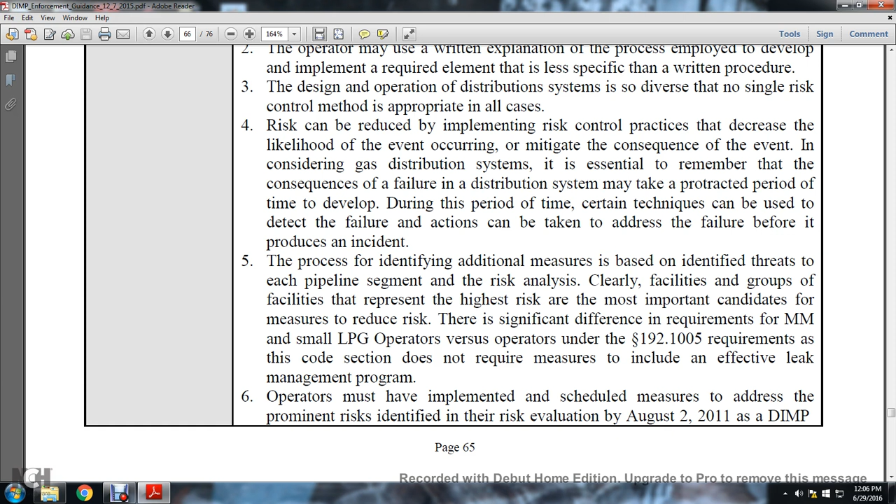5. The process of identifying additional measures begins by identifying the threats to each pipeline segment in the risk analysis. Clearly, facilities or groups of facilities that represent the highest risk are the most important candidates for measures to reduce the risk. There are significant differences in requirements for the master meters and the small liquefied petroleum gas operators under section 192.1005. The 192.1005 requirements of the code section do not require the measures to include an effective leak management program.

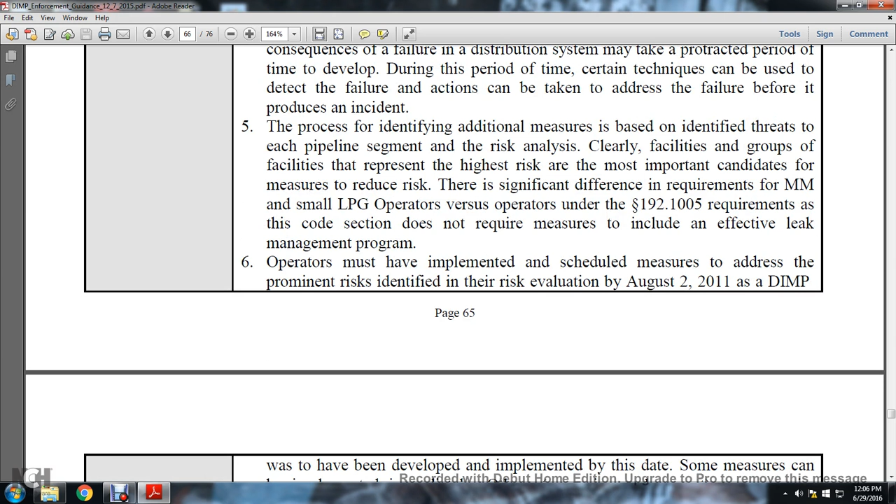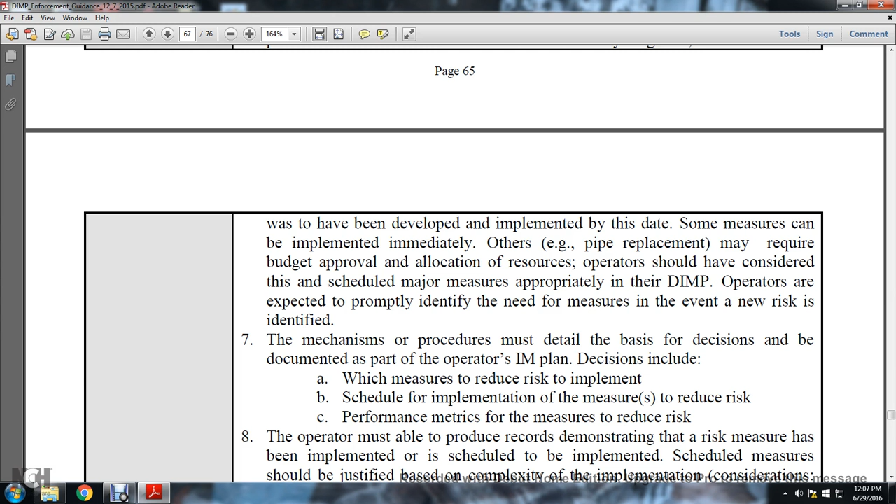6. The operator must implement scheduled measures to address the risks identified with the risk evaluation by August 2nd, 2011. The distribution integrity management program was to have been developed and implemented by this date. Some of the measures may be implemented immediately, while pipe replacement may require budget approval and allocation of resources. The operators should have considered the schedule of the measures appropriate within their distribution integrity management program. Operators are expected to promptly identify the need for measures for new risks identified. The mechanism or procedure must detail the basis of decisions, documented as part of the operator's integrity management program. Decisions include which measures reduce the risk, the implementation schedule, performance metrics, and measures to reduce the risk.

8. The operator must be able to produce the records demonstrating the risk measure has been implemented or is scheduled to be implemented. Scheduled measures should be justified based on the complexity of the implementation, budget constraints, procurement needed for additional resources, etc. 9. General information for the measures to reduce the risk scheduled for future implementation.

Operators should have the records demonstrating actions occurring with the implementation measures according to the prescribed schedule, budget schedule, and preliminary actions completed. For example, the probable violation of inadequate procedure: the operator does not have a mechanism or procedure to cover the task to be performed. The operator fails to follow the mechanism

procedure. No mechanism or procedure in place for identifying additional measures to prevent pipeline failure or to mitigate the consequences of pipeline failure. The mechanism or procedure does not identify the need for measures to reduce the risk. The mechanism and procedure does not require the scheduled implementation of the measures to reduce the risk. The mechanism and procedure to identify additional measures is not based on identified threats for each pipeline segment

of the risk analysis. The mechanism or procedure for evaluating additional preventive and mitigative measures does not adequately describe the method used to assure the appropriate selection of the risk mitigative measure intended to reduce the risk of a specific threat. And 8. The risk mitigative measure does not specifically address and identify the risk factors. The distribution integrity management program does not provide a schedule for implementation of mitigative measures. The impact of the preventive and mitigative actions on the risk was not adequately evaluated.

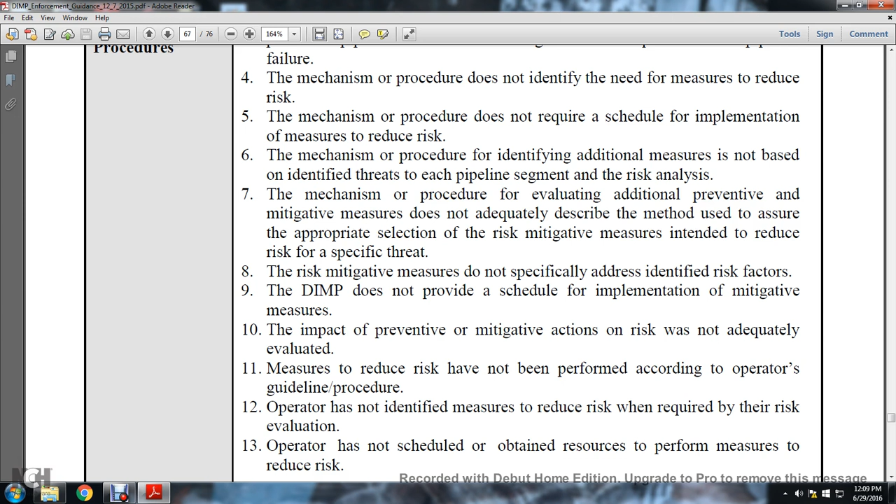Measures to reduce the risk have not been performed according to the operator's guidance and procedure. Operators have not identified measures to reduce the risk when required by their risk evaluation. Operators have not scheduled or obtained the resources to perform measures to reduce the risk. Depending on the circumstances, some examples listed in this section may be inadequate procedures, not probable violations; the enforcement tool to address these issues would be a notice of amendment, not a notice of probable violation or warning letter. Section 3 of the enforcement procedure provides guidance for selecting the appropriate enforcement action.

Examples of evidence: copy of the applicable pages of the operator's distribution integrity management program demonstrating an inadequate procedure. Copy of the risk evaluation demonstrating the measures to reduce the risk where they needed to be but were not scheduled. Documented photographic evidence demonstrating the violation. Documented oral or written statements from the operator personnel. Other special notations: none so far.

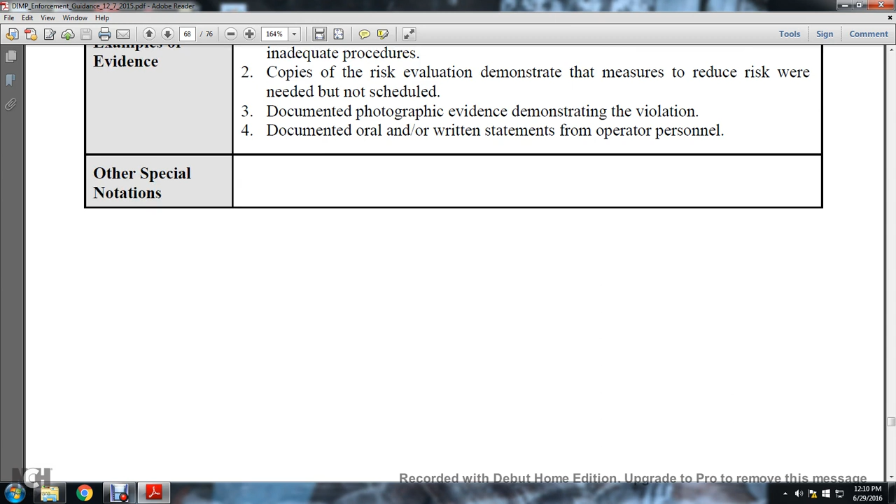Distribution Integrity Management, Part 192, revision date December 7, 2015, Section 192.1015(b)(5). Section title 192.1015: What must a master meter or small liquefied petroleum gas operator do to implement this subpart? Existing code language: elements of the written integrity management plan must address at a minimum the following elements: measure performance, monitor results, and evaluate effectiveness. The operator must monitor as a performance measure the number of leaks eliminated or repaired on the pipeline and their causes.

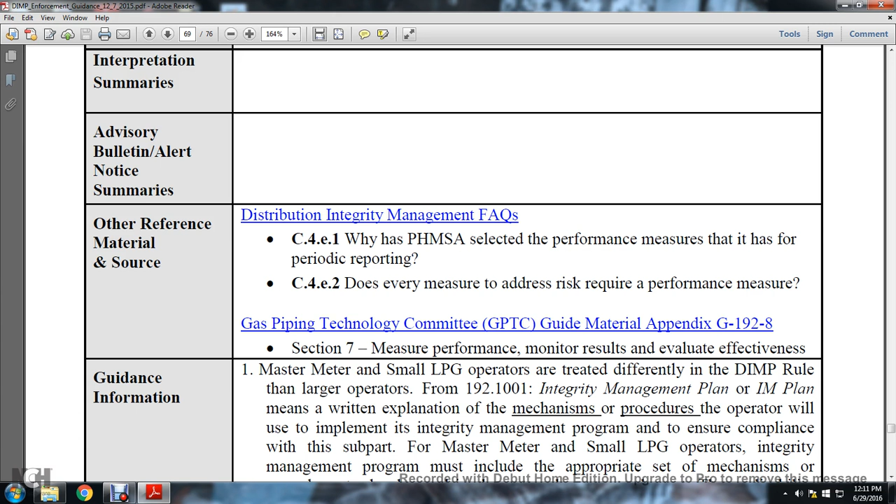The origin of the code is 74 FR 63906, December 4, 2009; last amendment. Interpretation summaries and advisory bulletins or alert notices: none noted. Other reference material sources: distribution integrity management frequently asked questions. C4E1: Why did PHMSA select the performance measures that it has for periodic reporting? C4E2: Does every measure to address risk require performance measures? See Gas Piping Technology Committee Guide Material, Appendix G-192-8, Section 7, for measuring performance, monitoring results, and evaluating effectiveness guidance information.

Master meter and small liquefied petroleum gas operators are treated differently in the distribution integrity management rule from larger operators. From 192.1001, integrity management plan, or IM plan, means a written explanation of the mechanisms or procedures the operator will use to implement its integrity management program and to ensure compliance with this subpart. For master meter and small liquefied petroleum gas operators, the integrity management program must include an appropriate set of mechanisms or procedures developed for implementing each of the program elements. The applicability of the word mechanisms for these operators is important.

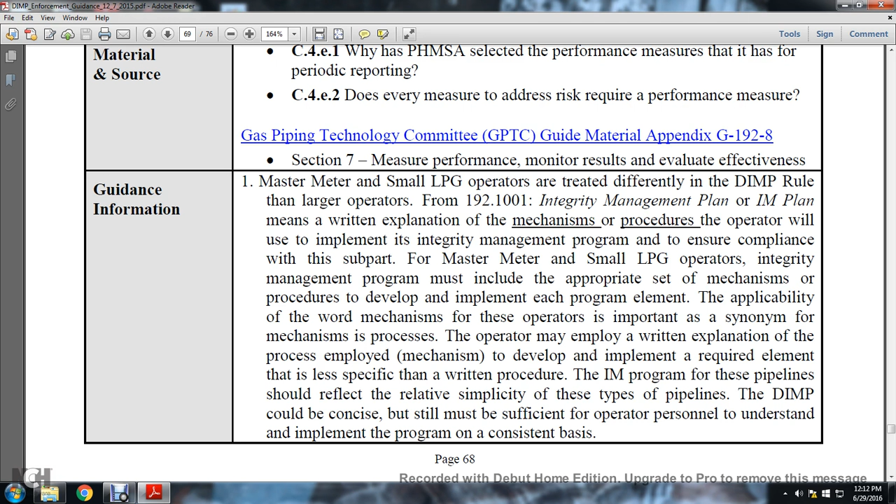Mechanism is a synonym for process. The operator may employ a written explanation of the process employed, or mechanism, to develop and implement the required elements that is less specific than a written procedure. The integrity management program for these pipelines should reflect the relative simplicity of these types of pipelines. The distribution integrity management program should be concise but still sufficient for operator personnel to understand and implement the program on a consistent basis. 2. The operator may use a written explanation of the process employed to develop and implement the required element that is less specific than a written procedure.

The mechanism or procedure used by the operator must describe how they collect the data for the performance measure, number of leaks eliminated or repaired on the pipeline, and their causes. The operator must identify how frequently they monitor the measure. The operator must have documentation demonstrating the monitored performance measure, number of leaks eliminated or repaired on the pipeline, and their causes.

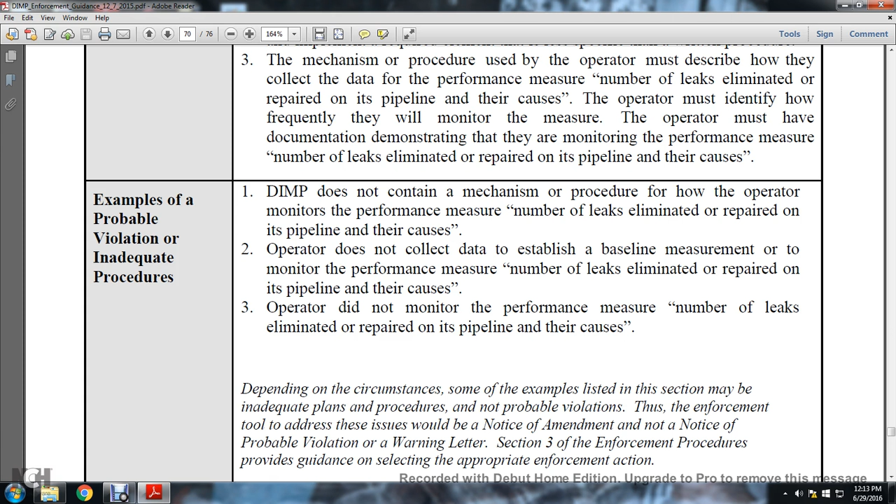Example probable violations and inadequate procedures: the distribution integrity management program does not contain a mechanism or procedure for how the operator monitors the performance measure, number of leaks eliminated or repaired on the pipeline, and their causes. The operator does not collect data established for monitoring the performance measure, number of leaks eliminated or repaired on the pipeline and their causes. The operator does not monitor the performance measure, the number of leaks eliminated or repaired on the pipeline, and their causes.

Depending on the circumstance, some examples listed in this section may be inadequate procedures, not probable violations. The enforcement to address the issue would be a notice of amendment and not a notice of probable violation or a warning letter. Section 3 in the enforcement procedure provides guidance on selecting an appropriate enforcement action.

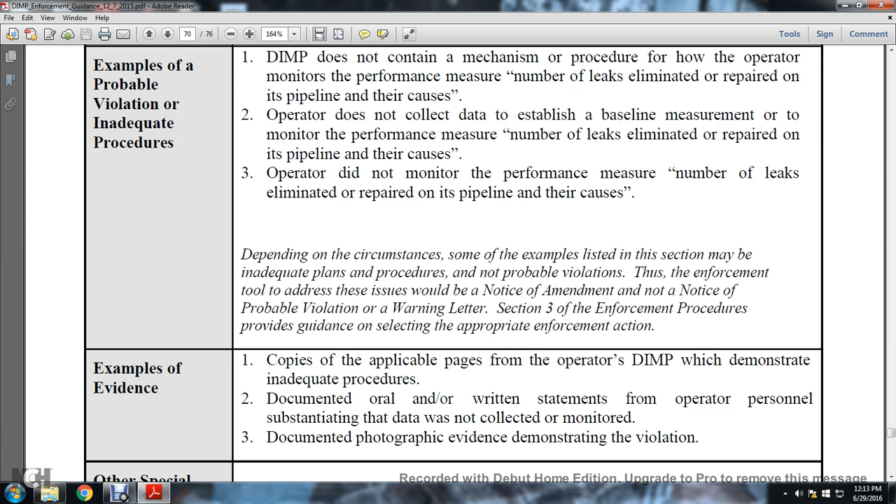Samples of evidence: copies of the applicable pages of the operator's distribution integrity management documents demonstrating the inadequate procedures, oral or written statements from the operator's personnel substantiating that the data was not collected or monitored, and documented photographic evidence demonstrating the violation. Other special notations: none so far advisable.

Distribution Integrity Management, Part 192, December 7th, 2015, 192.1015(b)(6). Section title 192.1015: What must a master meter or small liquefied petroleum gas operator do to implement this subpart? The existing code, (b) elements: the written integrity management plan must address, at a minimum, the following elements. (b)(6), periodic evaluation and improvement.

The operator must determine the appropriate period for conducting integrity management program evaluations based on the complexity of its pipeline and changes in factors affecting the risk of failure. The operator must reevaluate the entire program at least every 5 years. The operator must consider the results of performance monitoring in these evaluations. 192.1015, 74 FR 63906, December 4th, 2009.

Last amendment, interpretation summaries, and advisory bulletin and alert notice summaries. Other reference material sources addressed in the Distribution Integrity Management Final Rule Preamble to the Federal Register, Volume 74, Number 232, Friday, December 4th, 2009, Rules and Regulations. Comment topic: Integrity Management Program Evaluation and Improvement, page 63917.

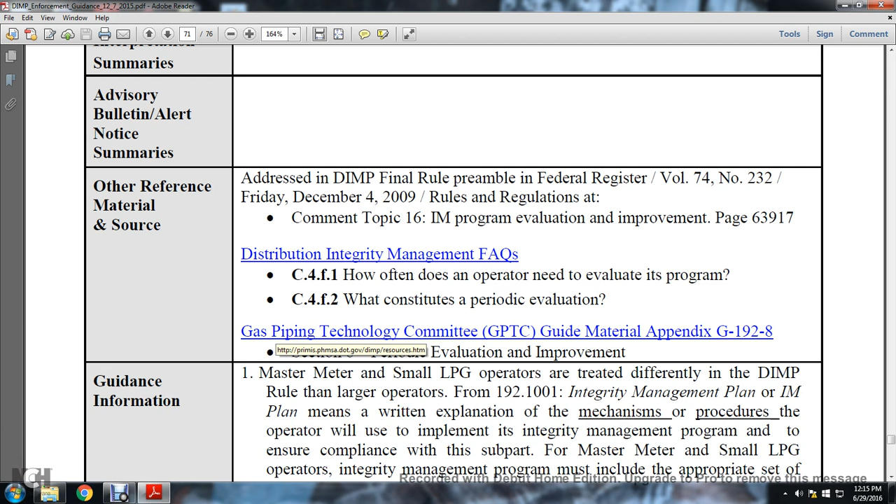Distribution Integrity Management frequently asked questions. C4 F1: How often does the operator need to evaluate the program? C4 F2: What constitutes the periodic evaluation? Gas Piping Technology Committee, GPTC Guide Material Appendix G-192-8, Section 8, Periodic Evaluation and Improvement.

Guidance information: master meter and small liquefied petroleum gas operators are treated differently in the distribution integrity management program from larger operators. From 192.1001, integrity management plan, or IM plan, means a written explanation of the mechanisms or procedures the operator will use to implement its integrity management program and to ensure compliance with this subpart. The master meter and small liquefied petroleum gas operator's integrity management program must include an appropriate set of mechanisms or procedures developed and implemented for each of the program elements.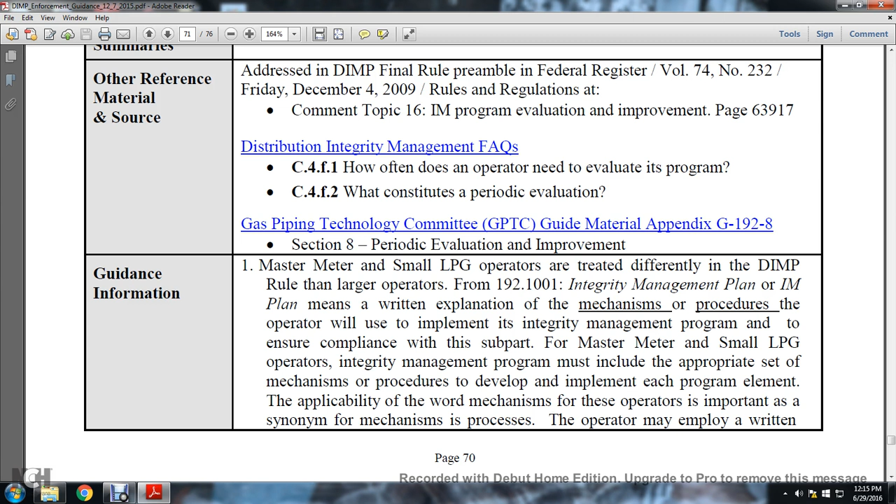The applicability of the word mechanism for the operator is important, as a synonym of mechanism is process. The operator may employ a written explanation of the process employed, but the mechanism developed and implemented for a required element is less specific than a written procedure. The integrity management program for these pipelines should reflect the relative simplicity of these types of pipeline. The distribution integrity management program could be concise but still sufficient for the operator's personnel to understand and implement the program on a consistent basis.

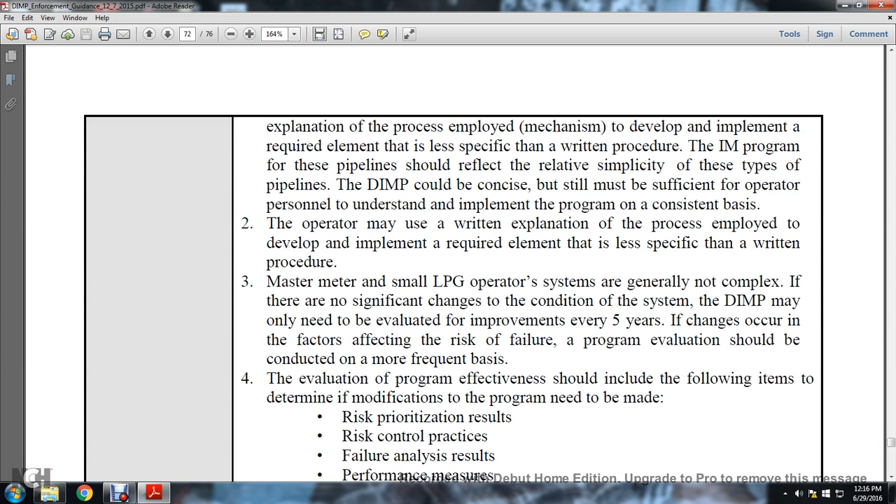2. The operator may use a written explanation of the process employed, developed, and implemented for a required element, less specific than a written procedure. 3. The master meter and small liquefied petroleum gas operator generally does not experience significant change in the condition of the system. Distribution integrity management only needs to be evaluated and improved every 5 years, but when changes occur in factors affecting the risk of failure, program evaluation should be conducted on a more frequent basis. The evaluation of program effectiveness should include the following items to determine whether modification of the program is needed: risk prioritization, risk control practices, failure analysis results, and performance measures.

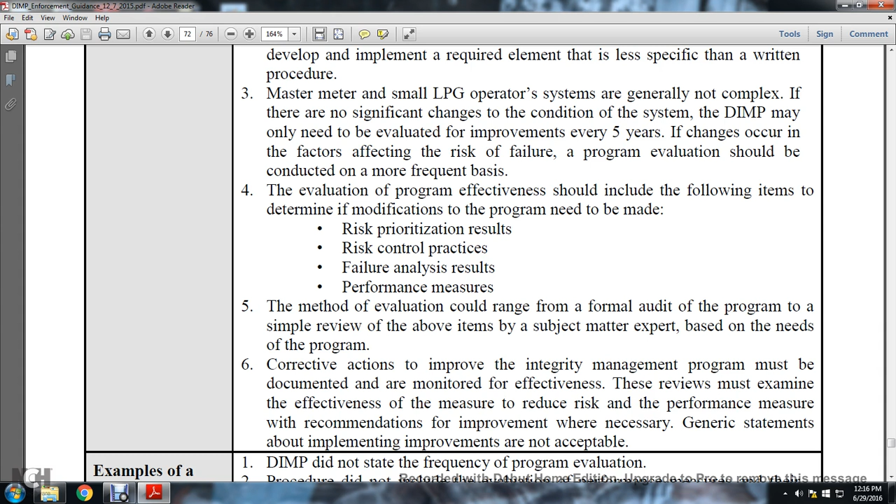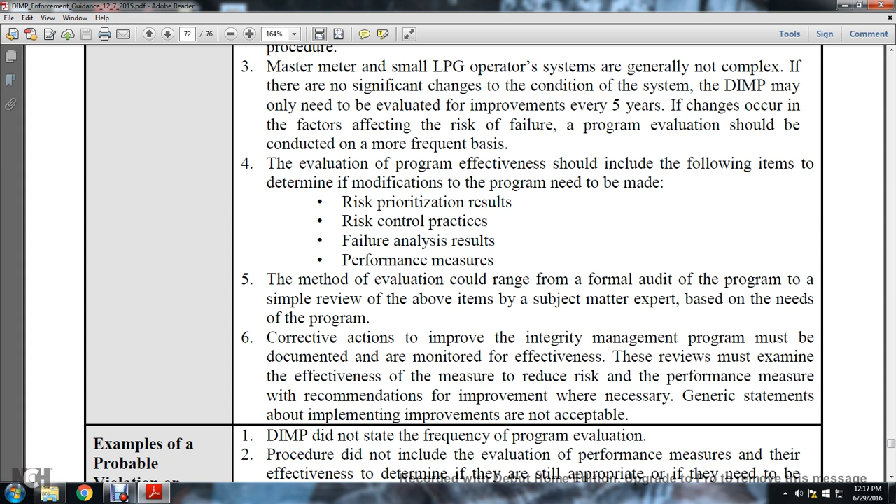5. The method of evaluation could range from a formal audit of the program to a simple review of the above items by subject matter experts, based on the needs of the program. 6. Corrective action to improve the integrity management program must be documented and monitored for effectiveness. The review must examine the effectiveness of measures to reduce risk and performance measures, with recommendations for improvement when necessary. Generic statements about implementing improvements are not acceptable.

Examples of probable violations and adequate procedures. The distribution integrity management program does not state the frequency of the program evaluation. Procedures did not include the evaluation of performance measures and their effectiveness, determining if they are still appropriate and if they need to be adjusted.

Evaluation. The operator does not have a mechanism or procedure that covers the task being performed through the evaluation. 2. The operator fails to follow the written mechanisms or procedures. 3. The procedure performance goals are not included in the procedure of the operator. The distribution integrity management program evaluation process does not specifically address the means or methods the operator implemented to track the distribution integrity management program performance.

The procedure does not have specific frequencies or time frames at which the operator must track the distribution integrity management program. 5. An operator's distribution integrity management evaluation procedures do not assess whether the program is effective in reducing risk, and the evaluation procedures do not provide the operator information for implementing improvements in distribution integrity management effectiveness based on findings from their evaluation.

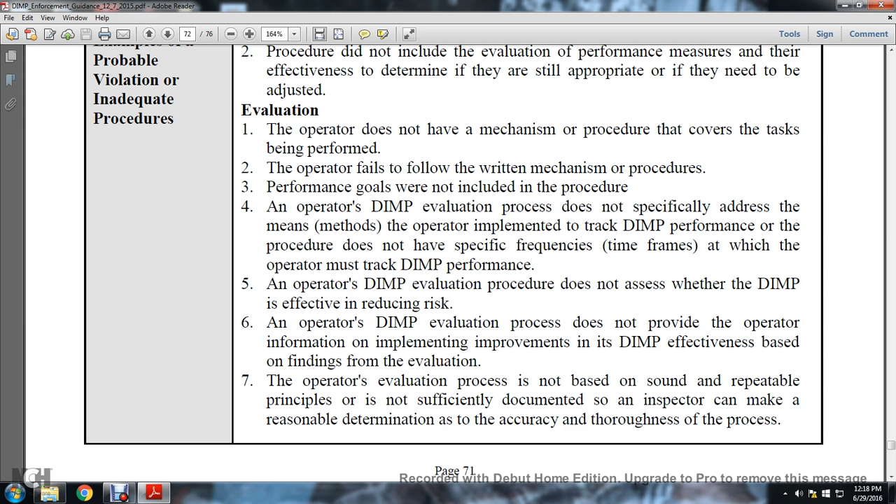The operator's process is not based on sound and repeatable principles, or not sufficiently documented so an inspector can make a reasonable determination of the accuracy and thoroughness of the process. Improvement. An operator did not change the distribution integrity management program as required to address the information obtained through annual reviews and program evaluations whenever any changes occur that materially alter the elements of the distribution integrity management program.

7.3. An operator did not actually implement the change to the distribution integrity management program where the program evaluation identified that changes were required. 3. An operator did not thoroughly document the change, including the purpose and date completed. The operator described the procedure but did not sufficiently document it so an inspector can make a reasonable determination as to the accuracy of the process.

Mechanisms or procedures do not include sufficient detail and clarity to allow anyone required to use them in the performance of the task. Implementation of the distribution integrity management program evaluation was not adequately performed and/or results were not adequately documented. Adequate actions were not identified to improve the distribution integrity management based on review of the evaluation. 3. The actions identified with the program evaluation were not adequately implemented. 4. The response to performance measures indicating poor performance was inadequate.

Depending on the circumstance, some of the examples listed in this section may be inadequate plans and procedures or probable violations. These are addressed with enforcement tools such as a notice of amendment, notice of probable violation, or warning letter. Section 3 of the enforcement procedure provides guidance in selecting the appropriate enforcement action.

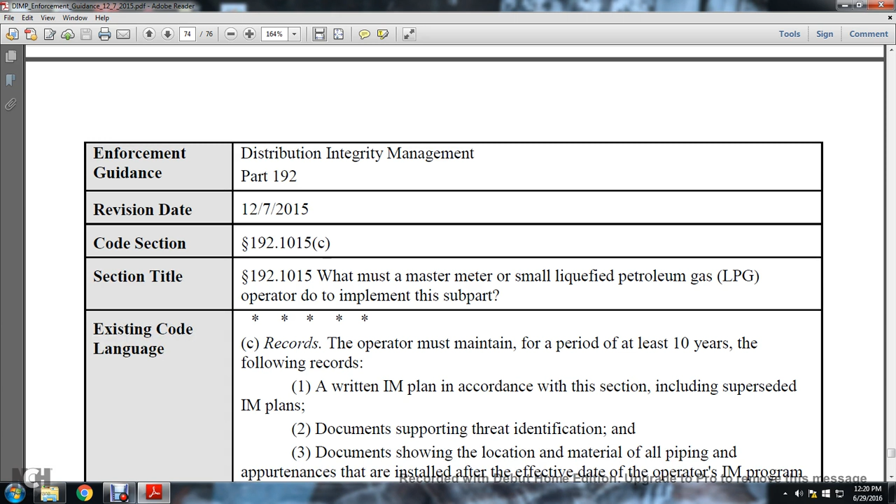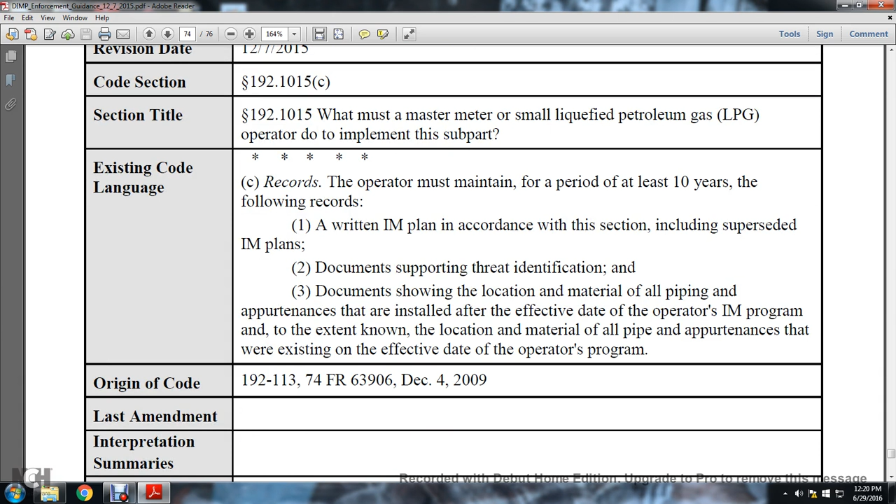The written integrity management program in accordance with this section, including superseded integrity management programs, documents supporting threat identification, and documents showing the location and material of all piping and appurtenances installed after the effective date of the operator's integrity management program, and to the extent known, the location and material of all pipes and appurtenances existing at the effective date of the operator's program. Original code 192-113, 74 FR 63906, December 4th, 2009. Last amendment. Interpretation summaries, advisory bulletins, alert notices and summaries.

Alright, distribution integrity management frequently asked questions. C4G1, when are operators starting to collect and maintain the records data needed for the performance measures? C4G3, can PHMSA, the Pipeline and Hazardous Materials Safety Administration, further define the number of excavation tickets on the new form? C4G4, for municipal operators or joint utility operators, should the number of excavation tickets include all excavation tickets received and sent for the gas department? C4G5, can multiple tickets for a single job be counted as a single excavation ticket?

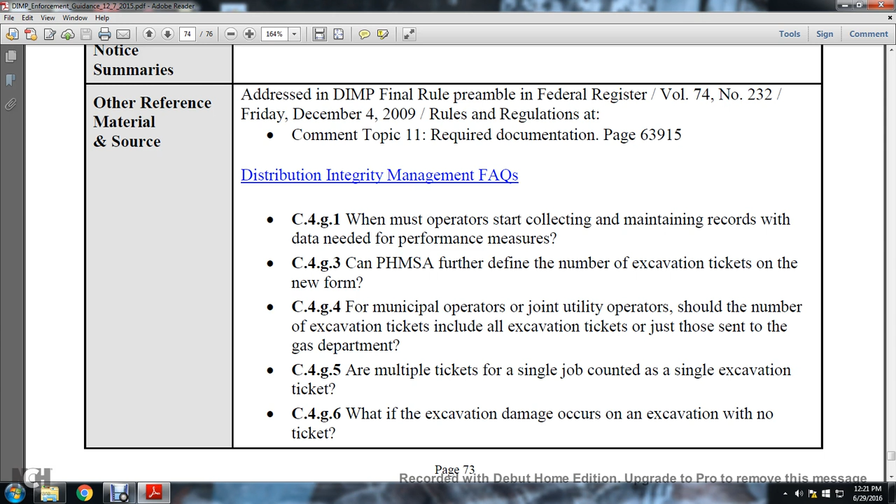C4G6, what about excavation damage on an excavation not on a ticket? C4G7, we have a lot of steel risers which can be tightened to eliminate leaks. We have not reported these on Form 7100 in Part C, total leaks eliminated or repaired during the year. Are these leaks considered reportable leaks per the Distribution Integrity Management Program? Should the threats be considered in the Distribution Integrity Management Program?

C61, what records does the operator need to maintain to demonstrate compliance with Subpart P? C62, must I retain all the records concerning developing the Distribution Integrity Management Program, 192.1011? C63, am I required to submit the Distribution Integrity Management Program to federal or state regulators? General information. Operators are required to maintain records to demonstrate compliance with Distribution Integrity Management for a minimum of 10 years, including superseded copies of the Distribution Integrity Management Program.

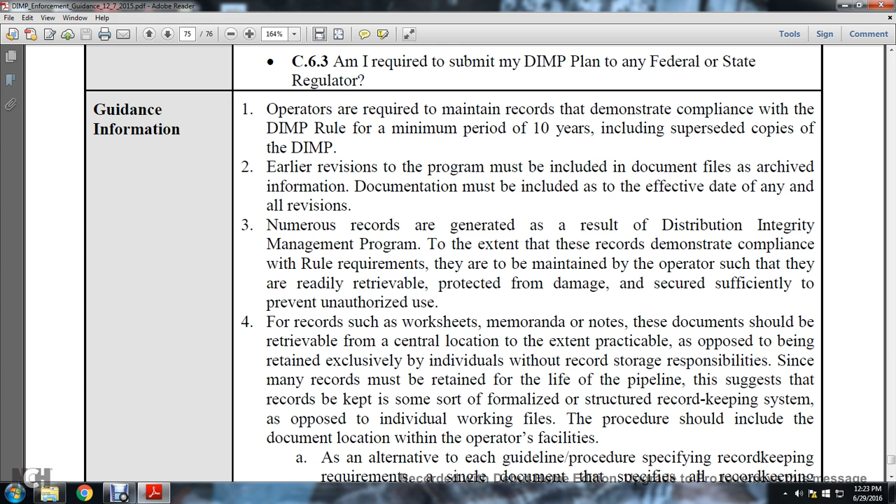Early revision of the program must include the documented files and archived information. Documentation must include an effective date of any revision, and numerous records are generated as a result of Distribution Integrity Management Programs to the extent that these records demonstrate compliance with the rule requirements, and they are maintained by the operator such that they are readily retrievable, protected from damage, and secured sufficiently to prevent unauthorized use.

For other records such as worksheets or memoranda, the documentation should be retrievable from a central location to the extent practicable, as opposed to being retained exclusively by individuals without record storage responsibility, since many of the records may be retained for the life of the pipeline.

This suggests that the records should be kept in some formalized structure of a record keeping system, as opposed to individual working files. The procedure should include the documented location within the operator's facility. As an alternative to each of the guideline procedures specifying record keeping requirements, a single document specifying that all record keeping requirements would be considered sufficient programmatic control.

Records: the records retained should be legible, readable, readily retrievable, durable, secured, and properly completed. Any procedure guidance for the threat identification risk assessment must be retained, as well as the results of the process. The periodic update of the risk assessment documentation would also be expected in the program files, including supporting records such as meeting minutes and subject matter expert reviews when conclusions are drawn.

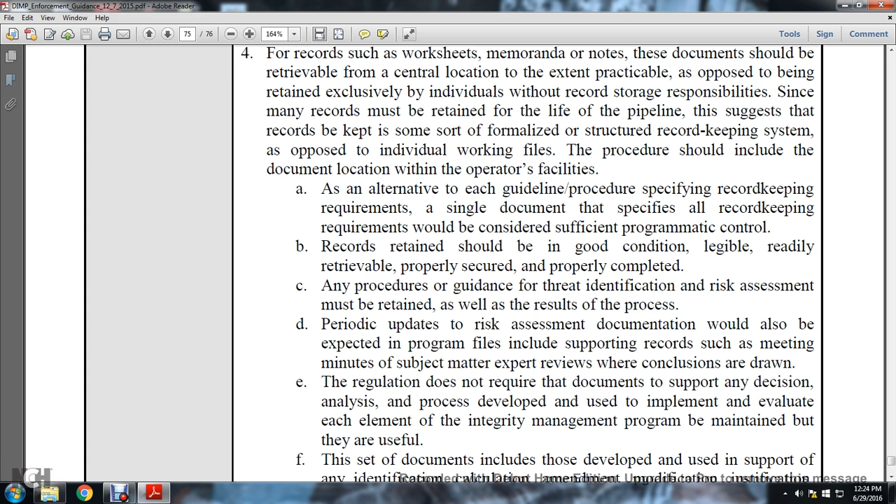The regulation does not require documentation to support any of the decisions or analysis processes developed or used in implementation and evaluation, each element in the integrity management program be maintained, but they are useful. This set of documentation includes the developing and using of support, identification, calculation, amendment, modification, justification, deviation, and determinations made, and any action taken in the implementation and evaluation of the program elements.

The operator needs a provision in writing for the distribution integrity management program for capturing and retaining data about new pipeline installations. Data from the new pipelines must be included with the characteristics to identify the threat and evaluate the risk in the operator's distribution integrity management program.

The data must include at minimum the location where the new pipeline is installed, along with the material and construction, and the operator could document this on maps or other drawings in the system.

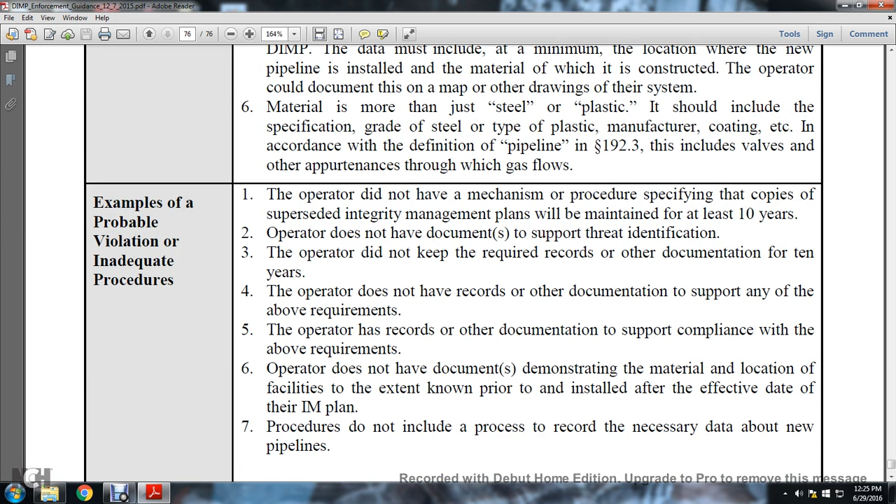The material is more than just steel and plastic. It should include the specification grade of steel, type of plastic, manufacturing, coating, etc., in accordance with the definition of pipeline in Section 192.3. This includes valves and other appurtenances through which gas flows.

Examples of probable violation - inadequate procedure: the operator did not have the mechanism or procedure specifying that superseded integrity management program copies will be maintained for at least 10 years. The operator does not have the documentation to support the threat identification.

The operator did not keep the required records or documentation for 10 years. The operator does not have records or other documentation to support any of the above requirements. The operator has records or other documentation to support compliance with the above requirements.

The operator does not have documentation to demonstrate the material or location of facilities, to the extent known, prior to and installed after the effective date of the integrity management program. Procedures do not include the process required for the necessary data of new pipelines.

Depending on the circumstances, some of the examples listed in this section that are inadequate procedures may not be probable violations. Thus, the enforcement tool to address the issue would be a notice of amendment, notice of probable violation, or warning letter. Section 3 enforcement guidelines provide guidance in selecting the appropriate enforcement action.

Examples of evidence: a copy of the operator's mechanism or procedure showing that it does not meet the specified requirements; a copy of the applicable page of the operator's distribution integrity management program showing that the required data collection and utilization of the data is not in the distribution integrity management program; documented photographic evidence demonstrating the violation; and documented oral or written statements from operator personnel. Other special notifications not foreseen.

And that concludes our 192 Gas Distribution Pipeline Integrity Management Enforcement Guidance for Title 49 CFR Part 192 Subpart P, Gas Distribution Pipeline Integrity Management Program.